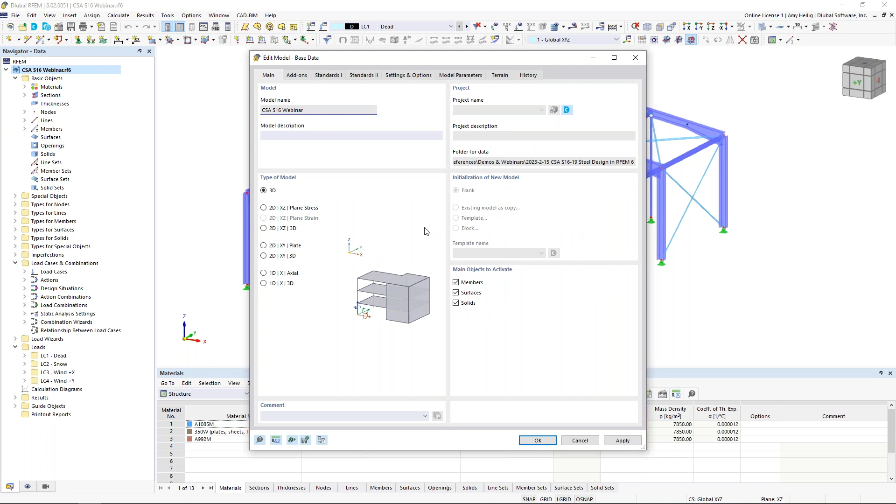Under this second tab, these are all of our optional add-ons. Notice that none of them are turned on right now. So everything that you'll see in this first portion of this webinar is involved within RFEM alone without turning on any of these add-ons.

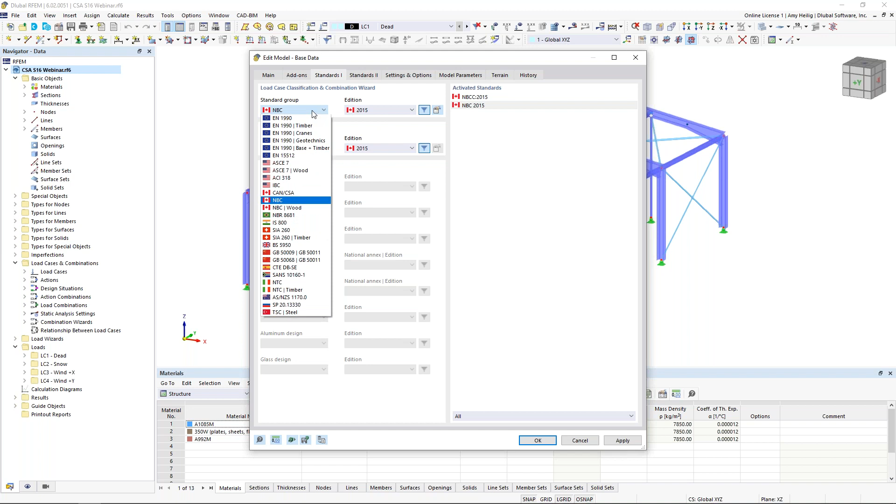Under the third tab, standards, we are going to generate our load combinations automatically according to the NBC 2015 standard. We are working in development on the 2020 standard, so that should be released fairly soon. But we also have access to all of our other international standards like the ASCE 7, the Eurocode, and many more.

Once this base data has been defined, we'll review the cross sections within the model. Over on the left, we can see all of the available cross sections here, including our moment frames, which are going to utilize W250 by 80 sections.

We have some tube sections, HSS 127 by 127, spanning between these moment frames. We have our lateral bracing here, which is going to be single angles. And then we have some pretty slender HSS columns at the front and the rear of the structure.

Notice that for these main moment frames here, these particular beams, we do have these set to a taper. So if we double click on these under the second tab, we can define a taper for any of the members, either at the start of the member or end of the member, and some additional options here.

We even can set the alignment here to the top of member, so notice that the member starts. I've converted this W250 by 80 to a parametric section and increased the depth to 500 millimeters, and then we transition back to the W250 by 80.

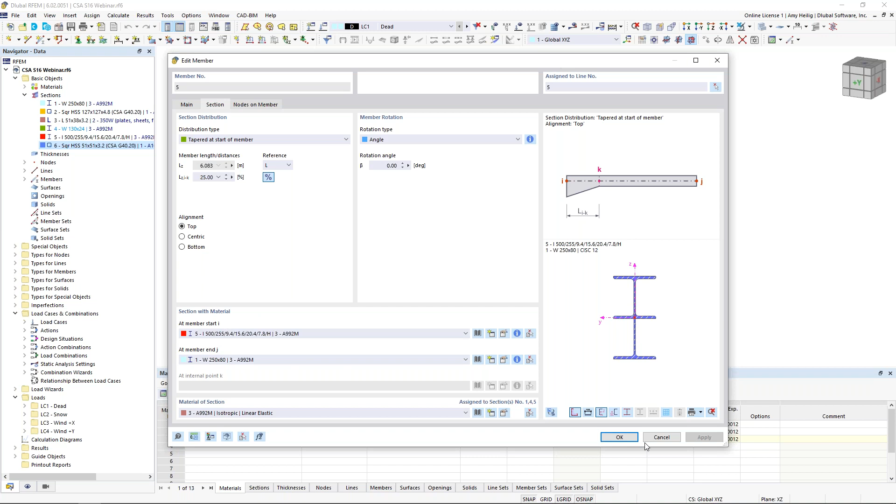We also have our materials listed here. Most of the HSS sections will utilize the A1085. Our single angles will be 350W, and our W sections will be A992.

What else is unique about this structure are the various member types. If we visit our navigator and the second tab in particular under display, this is going to control everything that we're viewing here in the graphical display.

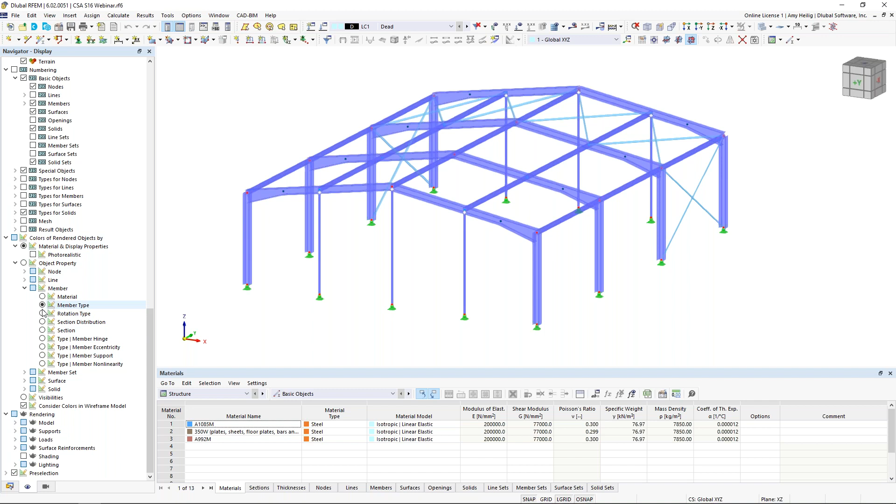If we scroll all the way to the bottom, we can actually render the colors of the model according to the member type. Notice these various member types are now color coded here. So we have our general beam elements, which is nothing more than just a standard beam or column.

If we double click on one of these, the member type is set here under this first drop down. We could activate hinges to release moment. If we leave this unchecked, everything is considered fully fixed.

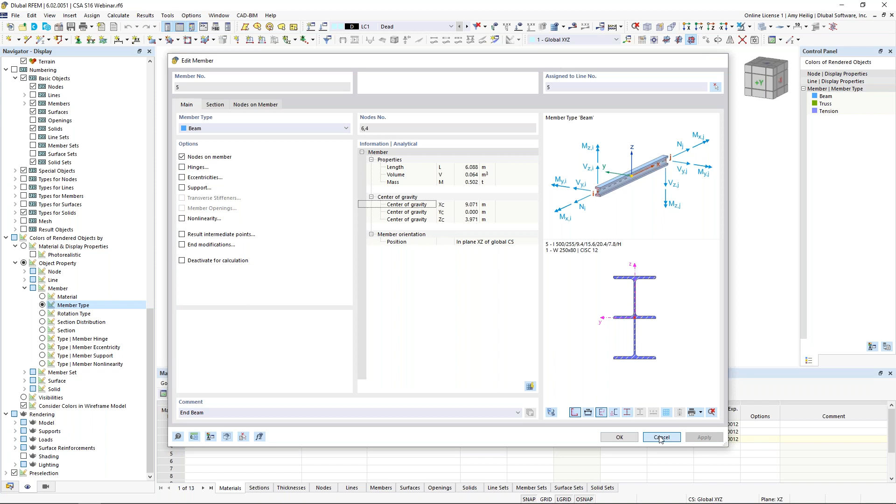But we also have what we call truss elements, so the member type is set to truss. Notice that this hinges option is now grayed out, because internally we're going to apply that moment release for truss elements.

And finally, we have our lateral bracing here, which are tension only. So exactly as it sounds, these members can only take tension forces. If they have any compression, they'll be deactivated within the analysis. RFEM is that nonlinear analysis program, so if tension forces are reintroduced in a subsequent iteration, we can reactivate those members.

So now that we've gone over a little bit about the structure, including the sections and materials, let us take a look now at our loads and load cases. I will activate here my load cases and combinations dialog box.

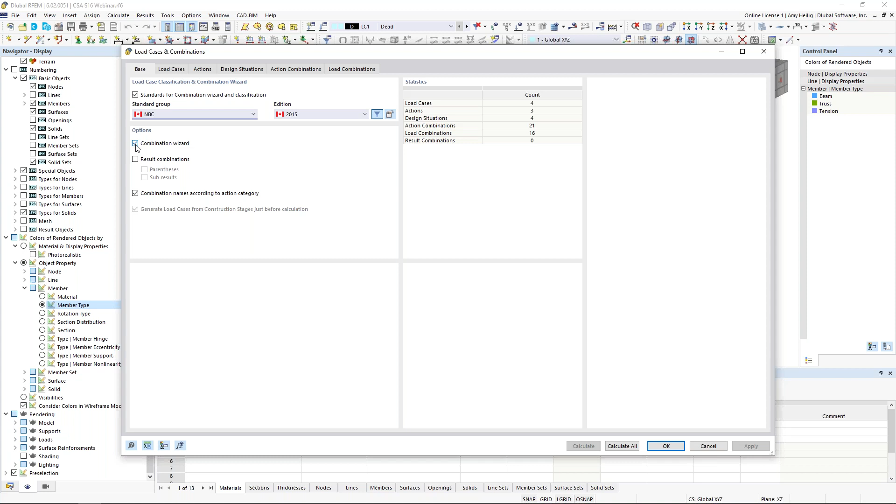Under the base tab here, this is just reiterating that we are going to generate our load combinations automatically according to the NBC standard. When this option is turned on, the program will automatically generate all of our load combinations according to this standard. Alternatively, we can turn this off if we would prefer to manually create the load combinations.

The load cases are listed here. So for example, 4 simple load cases for today: we have dead load with self-weight automatically turned on, and the action category is set to dead load. This is specific to the NBC. We also have snow load, wind in the X, and wind in the Y.

So the program will automatically generate for us what we call design situations. These design situations are needed a little bit later on when we do activate that steel design add-on, but it also is going to group together all of our load combinations.

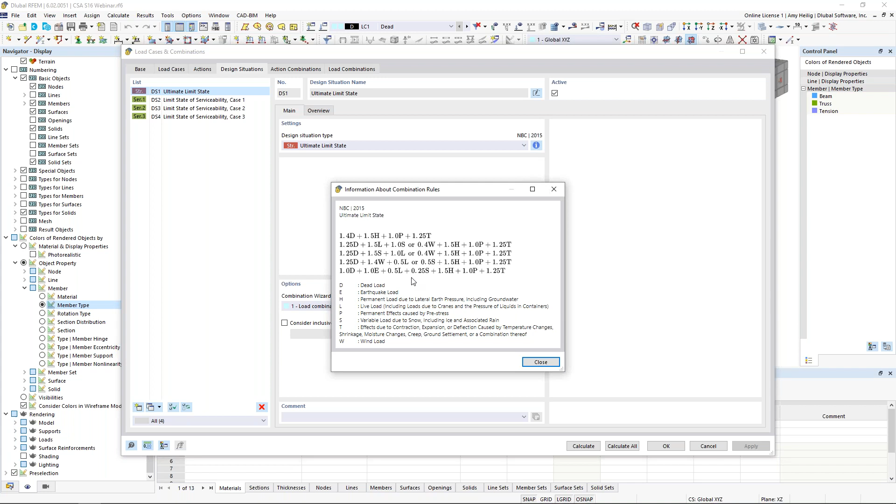Notice that we have an ultimate limit state design situation. This is going to be all of our factored load combinations. And if we'd like to see what this means or what it's referencing, we can click on this little info button to see directly from the NBC standard those factored load combinations.

Now we have 3 serviceability design situations as well. Again, we can click on this little info button—these are going to be our unfactored load combinations. If we don't want to use all 3 serviceability design situations, we can always uncheck the active box in the upper right hand corner, or we could delete it altogether with this button down here at the bottom.

But notice for these design situations, we have the option definition set down here, and we'll actually be in this dialog box quite a bit today. I just want to point out that initially our static analysis settings are set to second order by default. If we use this drop down, you can see we can modify this to a linear first order, or if we have cable elements or fabric membranes, for example, then we would be running a large deformation analysis, but the default is second order to account for those P delta effects, so something to keep in mind there.

If we jump to the load combinations tab, we can actually see the individual load combinations listed out, each belonging to that specific design situation. So here in red, we have our factored load combinations belonging to our first design situation, and then all of our unfactored load combinations belonging to those 3 serviceability design situations.

Each one is showing here that it's going to be run according to a second order analysis because we've already defined that under the design situation. But by all means, you can come in here and make individual settings for each load combination if you prefer.

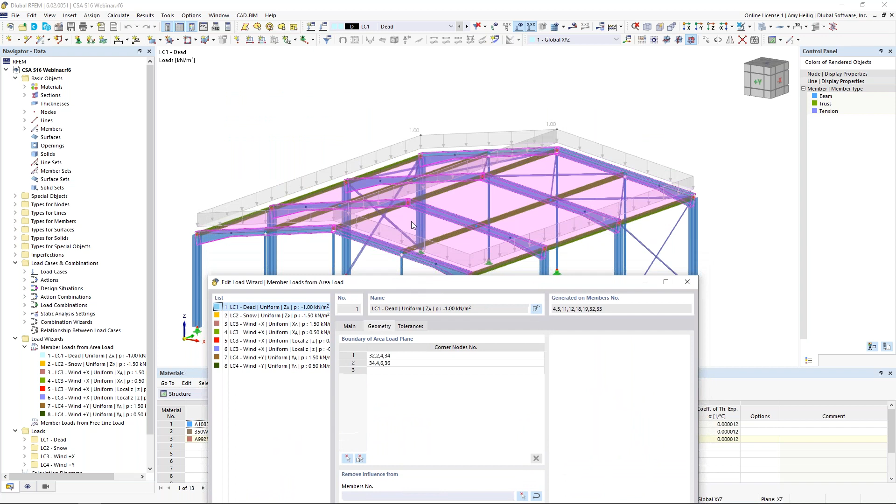I've defined the load magnitude at -1 kilonewtons per meter squared. Under the geometry, these are the 4 corner points that define the left plane and the right plane.

I took this a step further where we can exclude members from this generated area load. I graphically selected these 3 members here, visible on the left-hand side. Not only will the program exclude these 3 members, but it will also exclude all members parallel to it, saving time so we don't have to individually select each member.

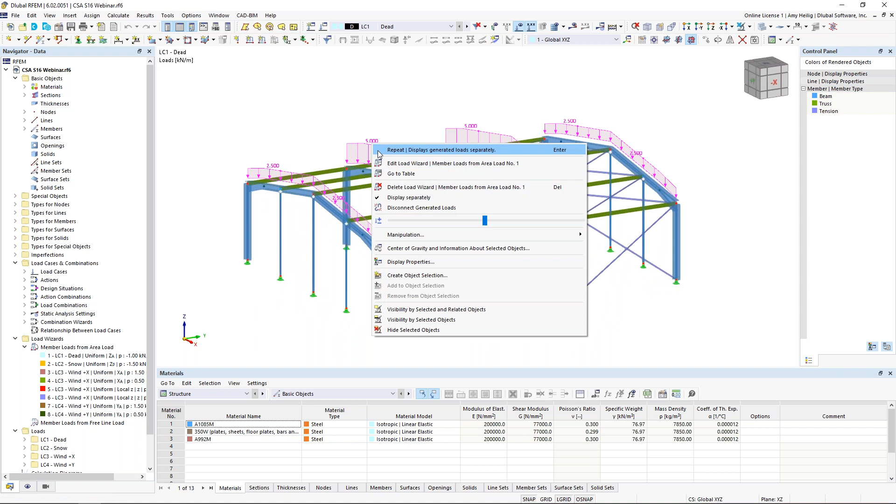Once this is complete, we see this generated area load, which we can right click to display separately. Notice my load is now being distributed only to those main moment frames. The tributary area is automatically accounted for, so nothing further to do here for dead load. We can right click and turn off the display separately to go back to the previous view.

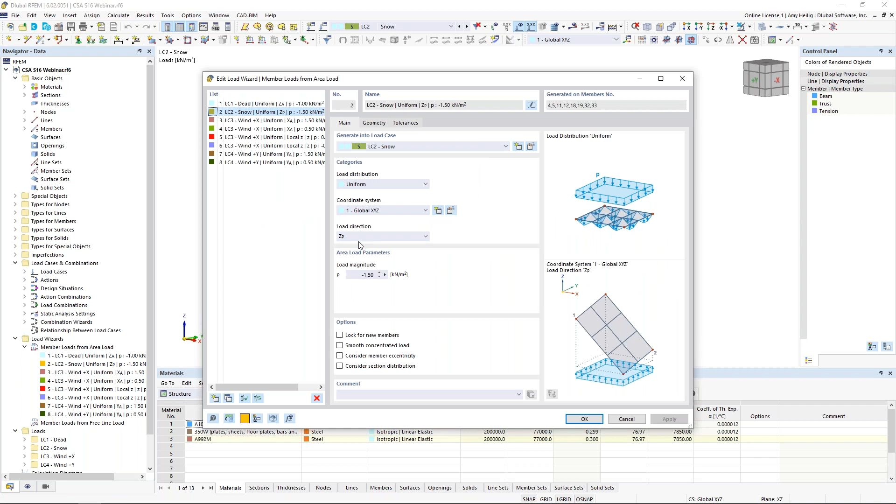As far as snow load, exact same concept here. The only difference is that I modified the load direction in the projected Z direction, so we can account for the angle of our roof and modify the loading according to that angle. The load magnitude was also adjusted to negative 1.5 kilonewtons per meter squared, with the same geometry here.

When I take a look at this in the model and display separately, it should look fairly similar to our dead load, but just with adjusted load magnitude.

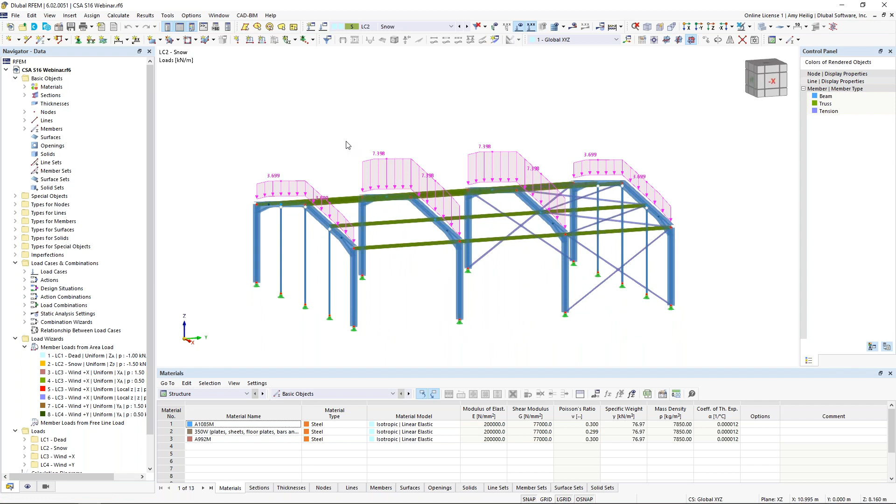Now, finally, we have our wind load. We are working in development to generate wind loads automatically, as well as snow loads according to the NBC standard. They will be available under the load wizard. We hope to release that fairly soon, but for now we need to manually apply these loads to the structure, and I've done so with those same member loads from area load generator.

You can see here I just modified where my planes are located, as well as the magnitude. We can right click to display separately. We're assuming our wind load is flowing from left to right based on the global x-axis, and we can see all of those member loads assigned here.

We can also take a look at wind in the Y direction. We're assuming wind flow here from right to left based on the global Y axis. Right click to display separately, and we can see those member loads attributed to each of those vertical members as well as horizontal members for this particular plane.

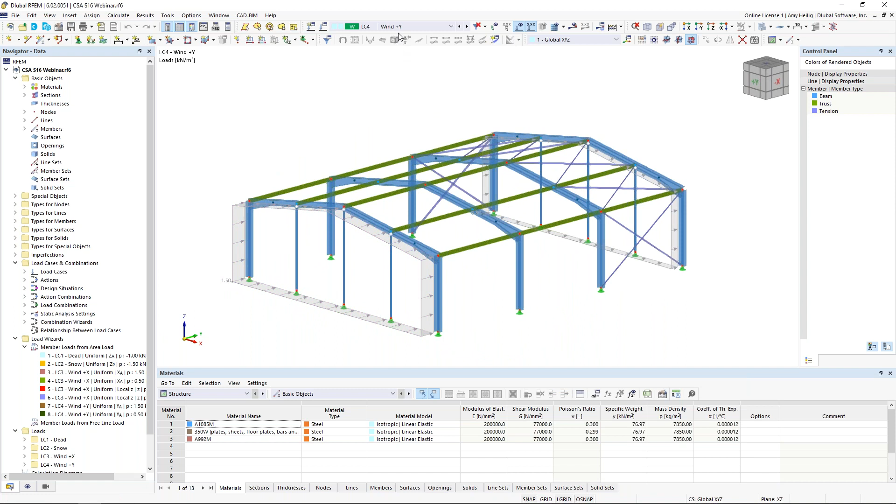Now that we have applied all of the various loads under the specific load cases, we can view our load combinations, and we have the ability to display all of these loads on the structure at once, including the applicable load factors from the NBC.

So what I would suggest doing early on in the model is to complete most of the modeling and the loading, and it's always a good idea to run a quick calculation before we get too far into it, to ensure that we don't have any modeling errors.

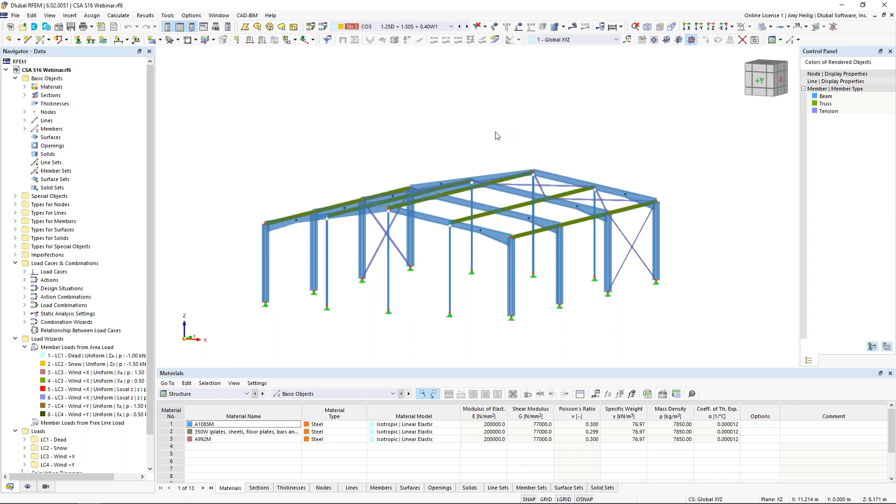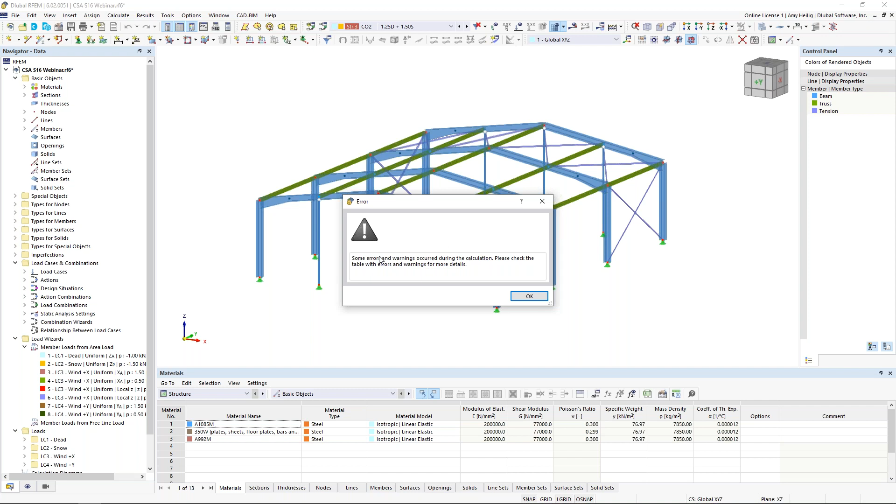So what we can do is jump to load combination number 2 here, 1.25 dead plus 1.5 snow, and I'm just going to run this single load combination. When I run the calculation up in my toolbar, we immediately notice that the program doesn't solve. We get an error message saying we have some errors and warnings, please check the table.

When we look at the table and click down in the cell, we see the program telling us that the stiffness matrix is singular. The structure is unstable about FE mesh node number 59, about the global x-axis, and we can see where that red arrow is pointing. That red arrow can actually help us troubleshoot instabilities a lot of the time, but that's not always the case.

If we have more of a global issue, this red arrow may not be so helpful. But in this particular case, if we zoom in, everything appears to be connected properly. We just have this pretty slender column framing up into the beam with our HSS tube in between frames. So I really don't know how to troubleshoot any further just by simply viewing the model.

So this is where we want to take advantage of our first add-on. I right click under my base data to go back to this dialog box that we previously saw.

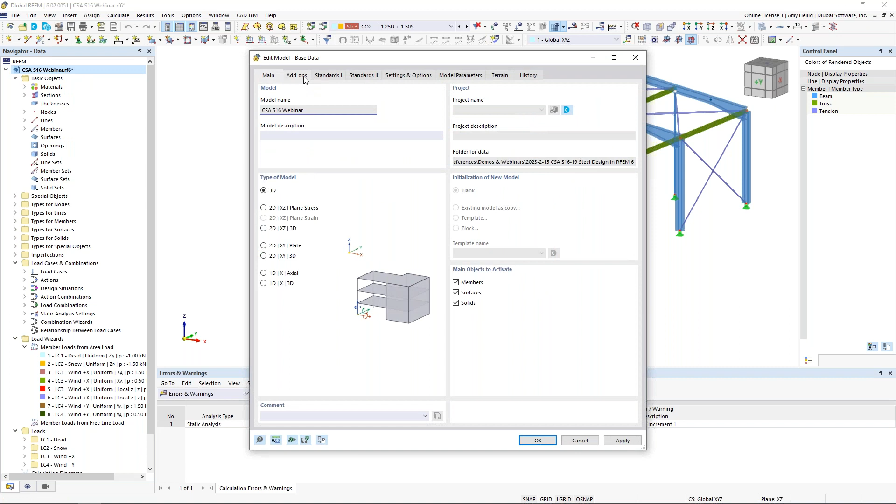Under the add-ons, we'll make the clear distinction here that we now want to activate the structure stability add-on. When I click OK, everything seems like nothing is much really changed within the model, but what we can do now is go back to the load cases and combinations dialog box, and under load combination number 2, we now have the ability to calculate the critical load utilizing that structure stability add-on.

So when I turn this on, we have some additional settings in this dialog box that pops up. The stability analysis add-on will actually run an eigenvalue analysis, and we can view all the different eigenvalues set here. The problem is if I try and run this calculation, I'll get another error, simply because load combination 2 doesn't solve either. So we have this feature on the right-hand side where we can actually calculate without the applied loading to check for instabilities by the mode shape.

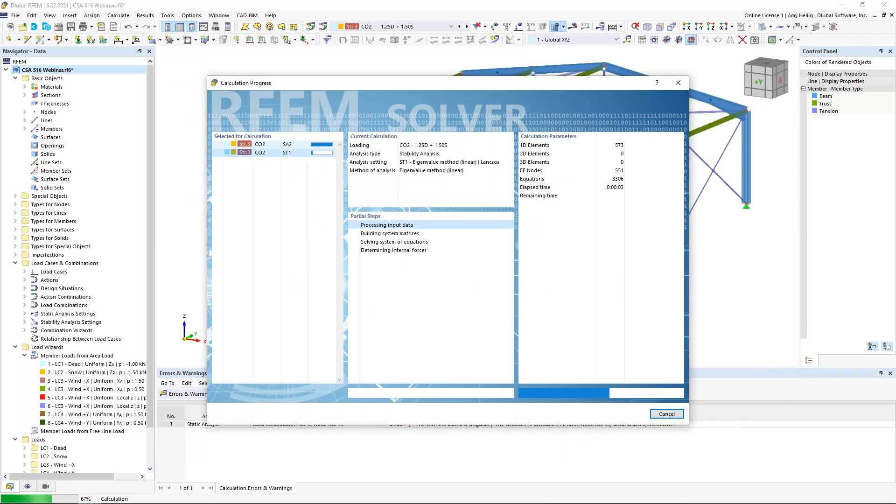Notice the number of eigenvalues is now grayed out. We leave this option active, I click OK, and I can click calculate while I'm here within this dialog box. Once again, we solve for load combination number 2. We still get an error, but now we do have some results for that stability analysis add-on.

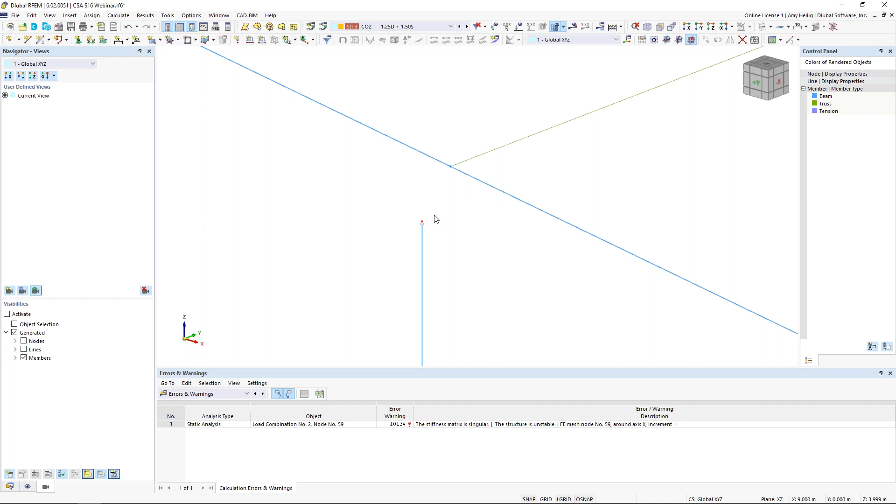And we immediately see where the problem lies. It almost appears as though this column is not connected to the member. Well, perhaps I turn off my results here and go into a wireframe view, zoom in much closer than I was previously, and I actually see that these two nodes are not connected. So this is a simple fix where we can just drag and drop that node to connect to that particular beam, and that should address the issue.

So we can see how that stability analysis add-on can be used to troubleshoot unconnected nodes, for example. Now that we've corrected that modeling error, let us go back to load combination number 2 here, and we'll turn off the structure stability add-on. We'll try and calculate once more. So we've addressed that modeling error, we run the calculation, and unfortunately what we see is still another instability.

So I click OK and I click down here in my error message, but notice that my red arrow has now moved. I have an instability about FE mesh node 128 about the global axis X. Well, at this point, I've already ruled out any modeling errors. All the nodes are connected, so all the supports are connected. So what can we do here?

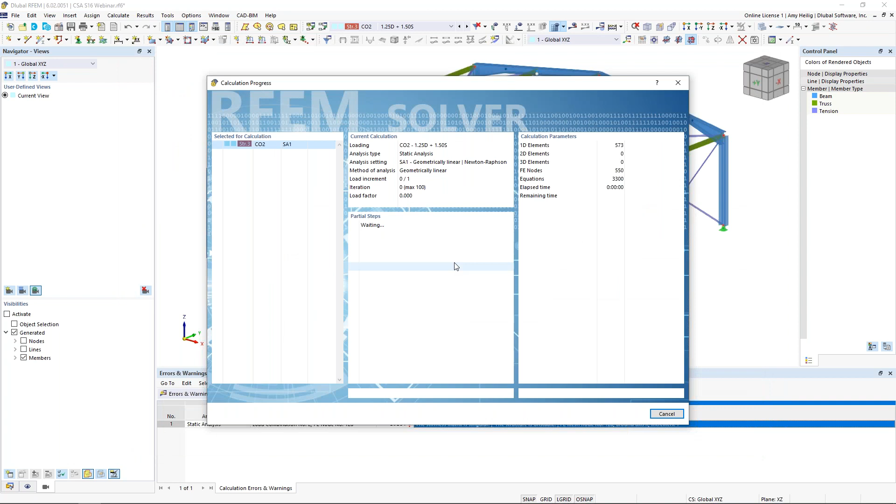Well, the first suggestion is remember that we're running load combination number 2 here according to a second order analysis. The best approach, if we've ruled out modeling errors, is to change this single load combination to a first order analysis. Let's see if the model solves by changing this analysis type. So we click calculate, and what we see is that the model solves just fine under first order.

So now we need to move on to troubleshooting for this second order analysis instead. Well, once again, we can take advantage of the structure stability add-on. So we reactivate this for load combination number 2. Let's go into the detail settings here. Now I'm going to turn off this option on the right-hand side.

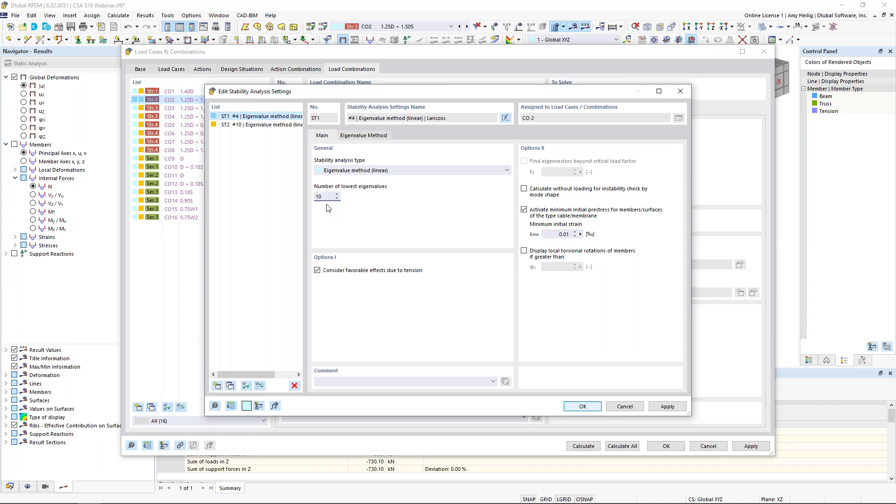The reason why is because we can run an eigenvalue analysis since load combination number 2 solves just fine under first order. Perhaps we increase this to show the number of lowest eigenvalues as 10. We click OK and we click calculate. So the program will run through that first order analysis, but now it's going to run an additional eigenvalue analysis to show us the first 10 failure modes of our structure.

So we use our drop down on the left to not look at the static analysis, but let's take a look at the stability analysis. And sure enough, here are our 10 different eigenvalues shown here in the drop down. We also see it down here in our table under stability analysis.

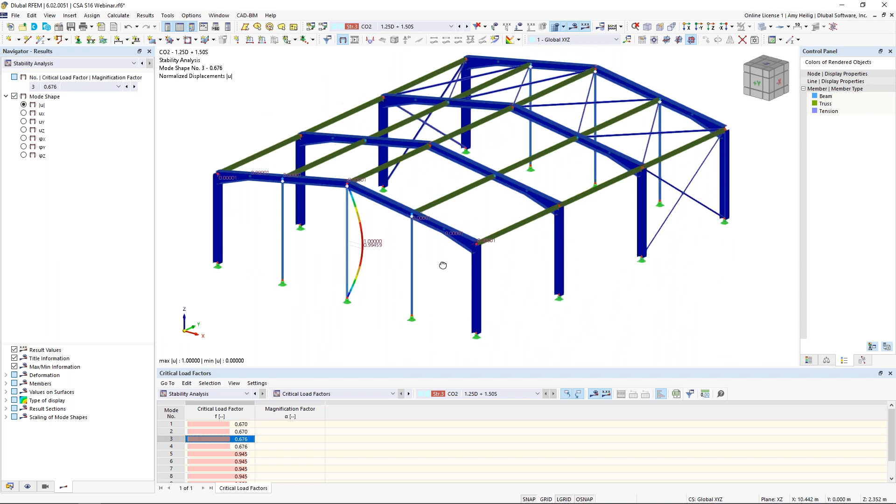And the first failure mode shape looks to be this very slender column buckling in plane. If we look at the second mode shape, same column buckling out of plane. We take a look at the third mode shape, and it seems to be the same column just on the other side. If we look at the critical load factor, we immediately see what the problem is. It is 0.67. This means that the structure can only take 67% of the loads from load combination number 2 before we're going to see this flexural buckling failure of these slender columns.

So anything under 1.0 is always a problem. So how do we address this? Well, probably the easiest fix is to increase these cross-section sizes. I think we can all agree just by looking at it, they're much too slender. So let us highlight all of these members.

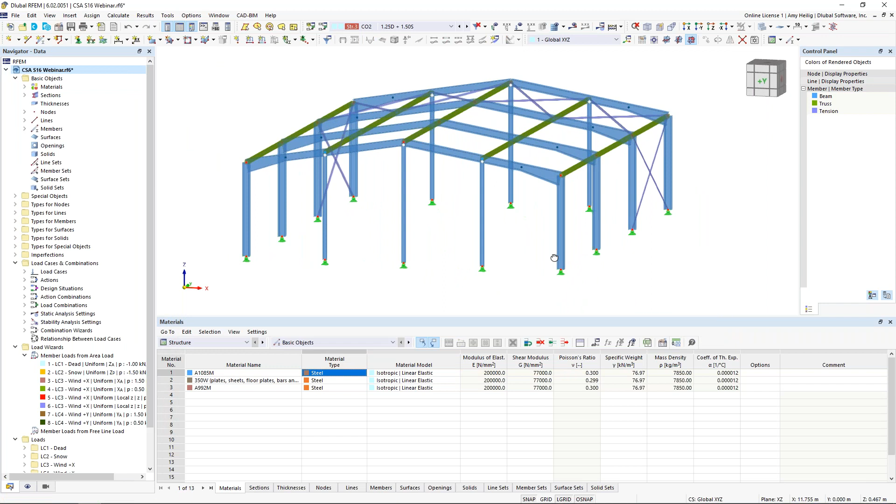We can double click here, and under the section, we can use our drop down to change these to an already defined cross section in my model, a W130 by 24. So let's completely change this to an I-beam here. I click OK. It's asking me to clear my results. That's fine. And now we can see the structure looks quite a bit better without those very slender members.

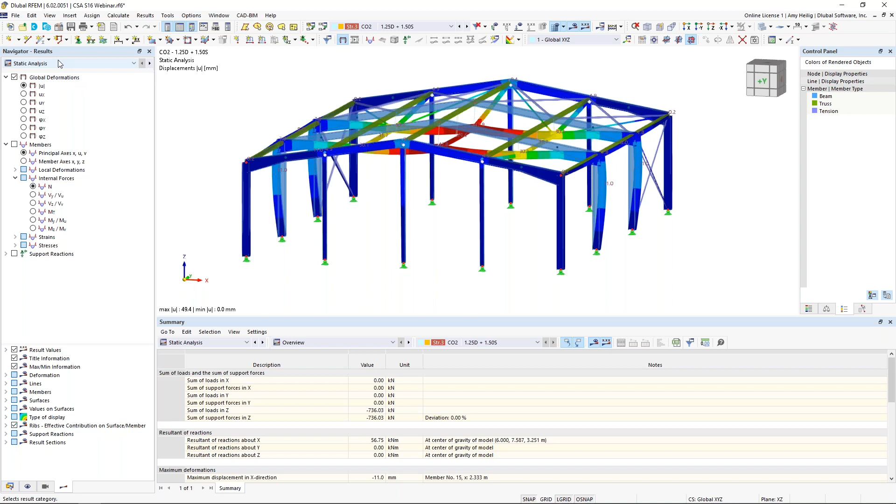So we go back to load combination number 2. We change this back to second order, and we can go ahead and run the structure stability add-on just to see how our results vary. When we modify this, what we see here is that second order should solve just fine. We also see here the stability analysis. So we're taking a look at the static analysis. If we jump down to the stability analysis once again, and we take a look at our first failure mode,

it once again is this column, but notice that my critical load factor is now 9.92. So what this means is that the structure can handle over 900% of the loads from load combination number 2 before we see some stability failure mode as we see here.

So again, that structure stability add-on can be incredibly helpful, not only for simple modeling errors of unconnected nodes, but when we're trying to troubleshoot something that we really can't determine just by looking at the model itself, such as failure modes under stability, we could certainly utilize that add-on.

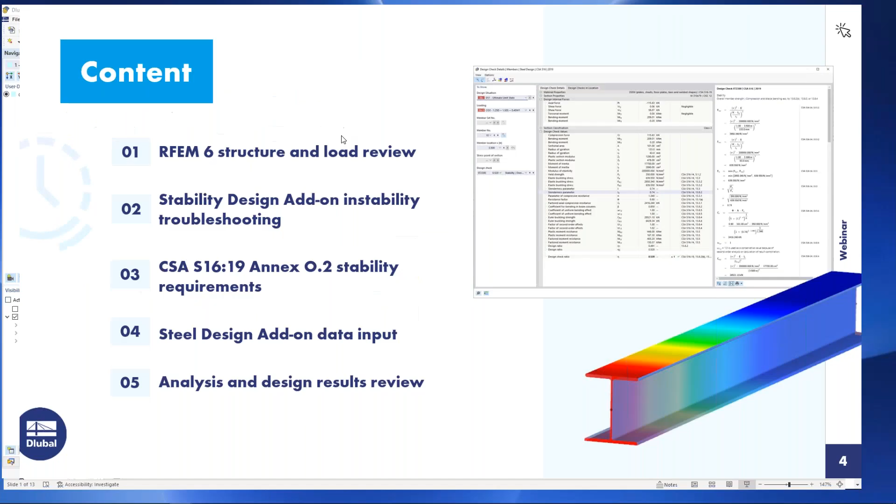All right, so now that essentially our modeling, our loading is complete, let us jump back to the PowerPoint here, and we'll discuss specific to the 2019 standard stability considerations.

And we know in clause 8.4, the code tells us that the structure absolutely has to be defined or designed for stability. Looking at 8.4.1, the code tells us that stability shall be provided for the structure and all elements of the structure, considering topics such as deformation, second order effects such as big P delta, little p delta. We have geometric imperfections, stiffness reductions, and uncertainty in strength and stiffness.

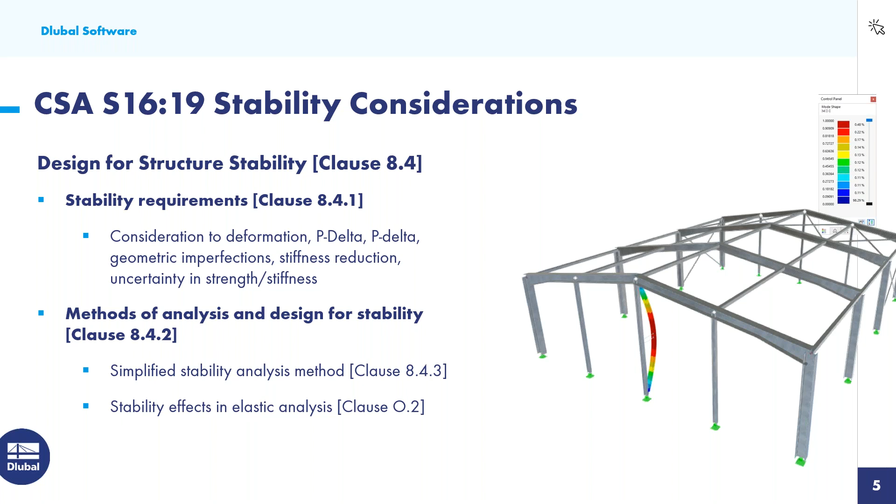Well, within the code, in particular clause 8.4.2, we are given two methods for the analysis and design for stability. The first is this simplified stability analysis method in 8.4.3. So for those of us that have been doing steel design for quite some time according to the CSA standard, this is probably nothing new. But within the 2019 standard, we know that there has been an alternative method added, which is stability effects in elastic analysis in Annex O, which is laid out in clause O.2. And this is what we're going to be focusing on today and how we can apply that directly to our structure. But before we do, let's discuss the simplified stability requirements.

And this method, again, is given in 8.4.3. The first requirement is P delta effects. This is explained further in 8.4.3.2, and we have two options to consider these second order effects. The first is simply a second order analysis, and we saw back in RFEM for our load combinations as well as what we set under the design situation that all of those load combinations will automatically be solved for according to second order. So this is certainly our approach here. The alternative method is to apply what we call the U2 amplification factor, and this is given in 8.4.3.2b.

So we take this amplification factor and we apply it to the member's axial loads and bending moments from the first order analysis. So perhaps your software only has the capabilities for a first order analysis, or you're doing hand calculations, then you would probably be utilizing this U2 amplification factor.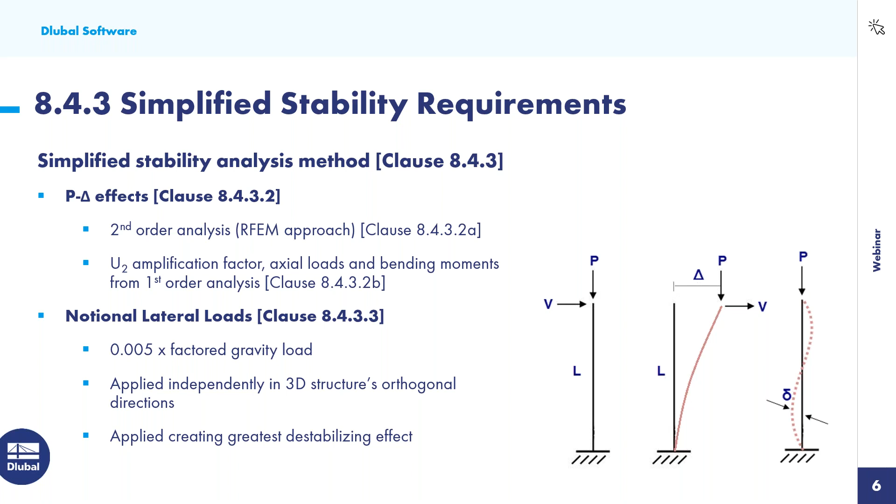And one last thing to keep in mind is that if we are applying notional loads to the top of the member, we do want to apply an equal and opposite load to the bottom of the member to correct that fictitious horizontal reaction at the base of the member. We don't want to over design our foundation here. This is really for the member design.

Okay, so now that we have taken into consideration the simplified stability analysis, we have this alternative now in Annex O laid out in Clause O.2 for stability effects in the elastic analysis. There are several requirements, some similarities, some differences here from this simplified method.

The first is geometric nonlinearities for second order effects according to O.2.2. So we do want to account for big P delta here, and we saw this on the previous slide. The program will automatically account for that, no problem.

But it does also mention P little delta effects that the simplified method did not. So there are conditions to neglect P little delta effects, and these are laid out in O.2.2 A through D. So if you do meet those requirements and you are designing according to Annex O, perhaps you don't necessarily need to consider P little delta.

If you do include P little delta, the advantage here is that this factor given to us in Chapter 13, under member axial compression and bending design, U1, we can set equal to 1.0. This factor is used to account for second order effects due to deformation between the member ends. So again, the advantage of including P little delta in the analysis is that we can automatically set this factor to 1.0.

So we might be wondering, well, we know probably RFEM includes big P delta, but does it include little P delta as well? Well, we actually have a knowledge base article, number 1759, directly on our website, and I have set the hyperlink here. So if we access this knowledge base article, we can see that the title is Consideration of P Little Delta Second Order Effects in RFEM 6.

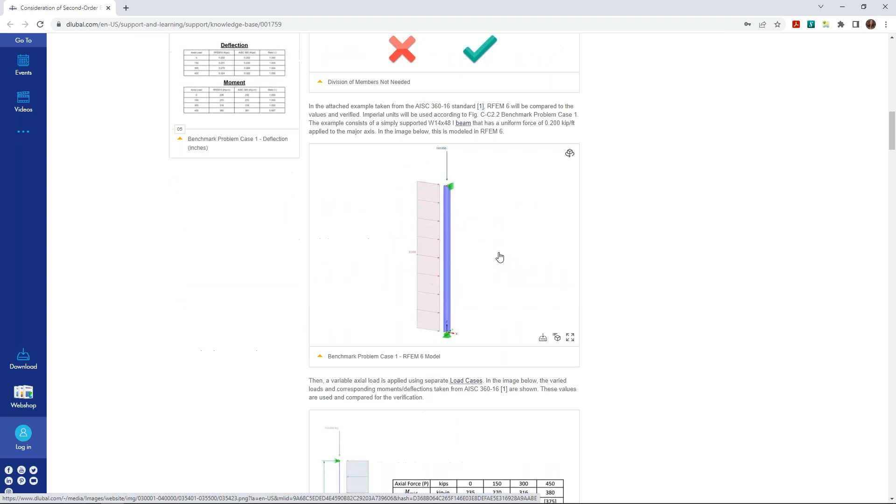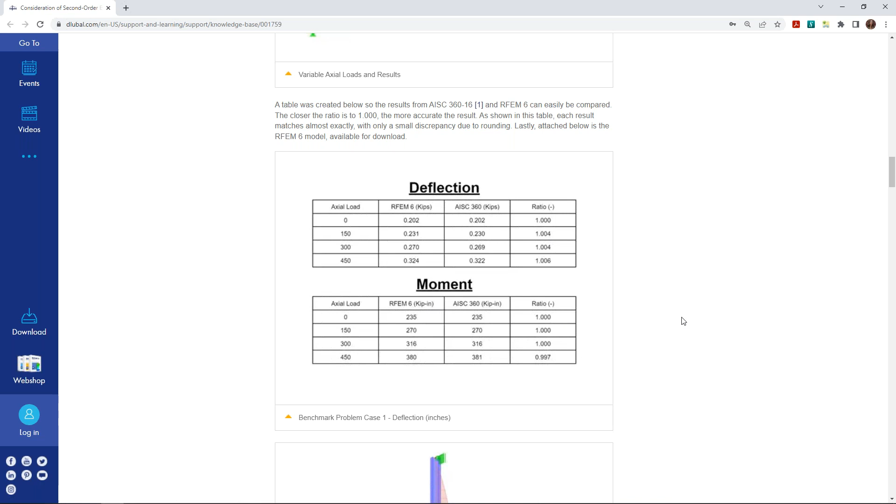And if you're interested to take a look at this article, you can zoom in here and we can actually see the ratios comparing the AISC to RFEM, and we see those ratios are very, very close to 1.0. This PowerPoint will be available to you on our website after the presentation, again, with the hyperlink to this knowledge base article if you'd like to check that out further.

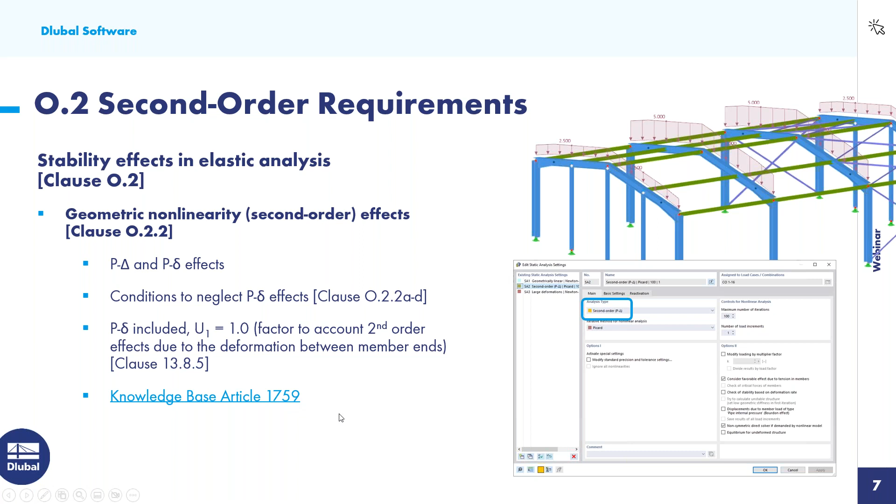All right, let us move on to imperfection requirements. Geometric imperfections are addressed in Clause O.2.3, and the code tells us that member and local geometric imperfections can be neglected for the elastic analysis.

Rather, we're concerned with global geometric imperfections, and there's a couple listed methods for these. Now, before we look at these methods, there are a couple criteria where we can completely neglect global imperfections for lateral load combinations only, and these are listed in O.2.3.1.

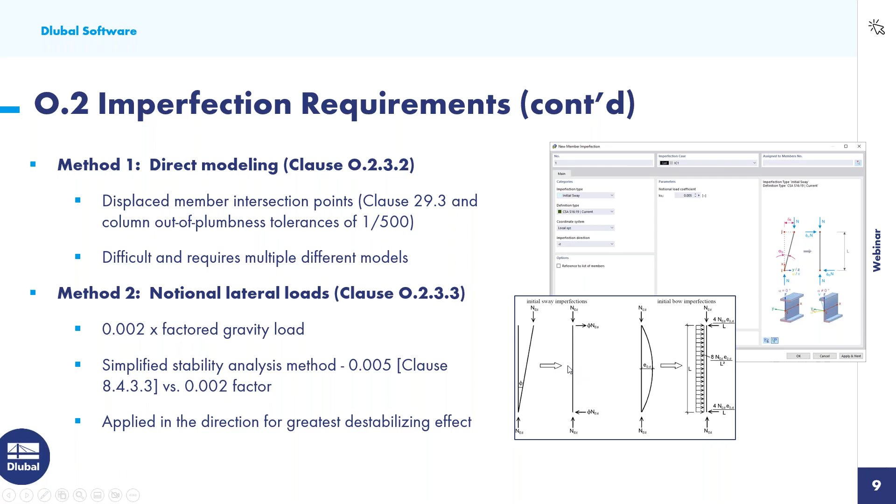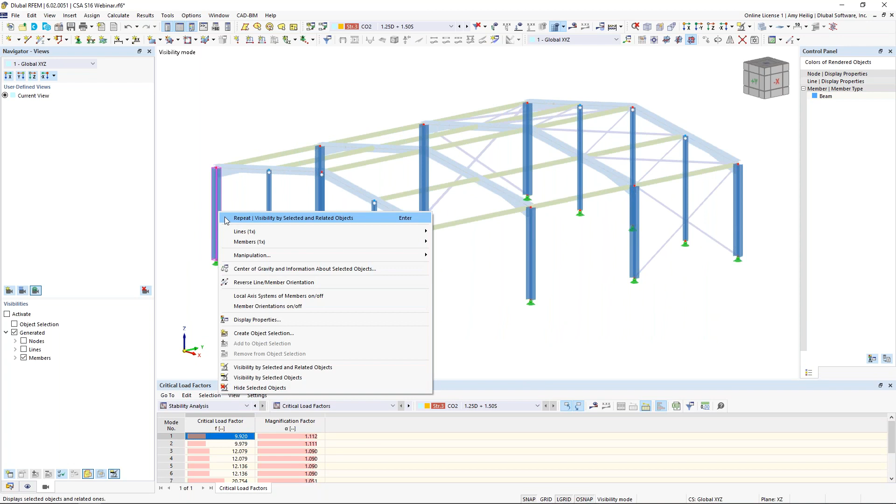So we will go back here to the RFEM model to see how we can apply those notional loads to our vertical members here. Well, I'll begin by selecting all of my vertical elements by holding down my shift key, and I'll create a user-defined visibility here for only my columns. And I'm going to right click, and under the right click options here, we can turn on our local axis system of each member. Now, to apply the notional loads, we go back to our navigator, and what we should see over on the left is a folder called Imperfections.

The first option under this folder is Imperfection Cases, where we can right-click to create our new imperfection case. The first case is going to be imperfections in the positive X direction, and our second imperfection case is going to be imperfections in the Y.

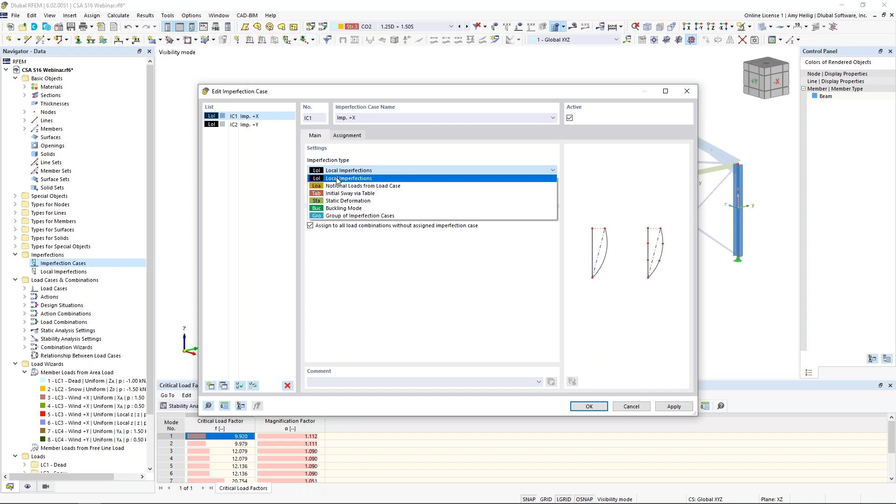With these imperfection cases, we have many different types available, but we're focusing here on local imperfections to be applied directly to the members. Now, under the assignment tab, remember we're creating the greatest destabilizing effect. So my imperfections or notional loads in the X direction should be assigned to my wind in the X direction, and my imperfections in the Y should be applied to my wind in the Y.

Notice all of our generated load combinations are already listed here in the background. The program's intelligent enough to apply these imperfections to our gravity load combinations, but my imperfection in the Y will only be applied with my wind in the Y. We'll never see imperfections in the Y applied with wind in the X. This would just create more load combinations that aren't going to be controlling, so it's really not something we need to include.

Once we have created the imperfection cases, we click OK, and it asks me to clear my results. We should now see those available under the local imperfection tree option over on the left. We actually need to now apply those notional loads to each of these vertical members.

Under my first imperfection case in the X, I can double click on member imperfections to open up this dialog box. The imperfection type is initial sway. Remember, we talked about initial bow, but we're going to focus here on the initial sway. The definition type can be set to the CSA S16.

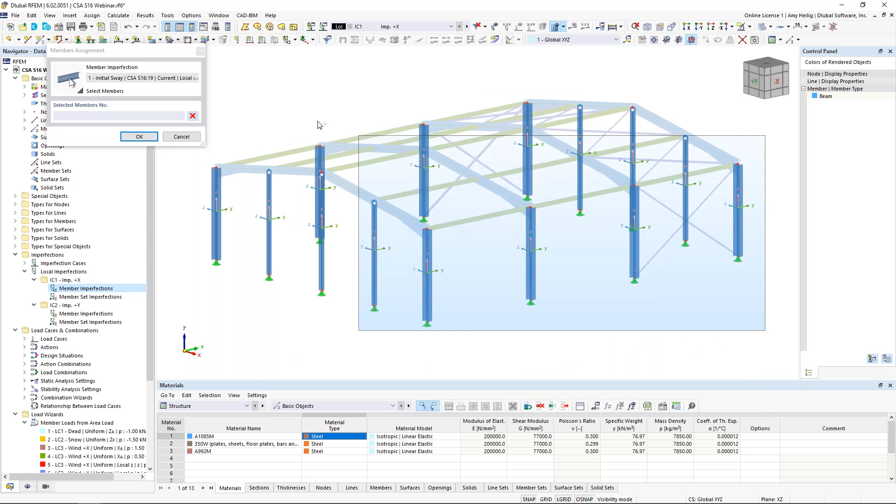Now the notional load coefficient, 0.005, is the default from the simplified method. Let us modify this to 0.002 from Annex O. And then we can graphically select all of our vertical members shown here. You can see they're now listed. I click OK. I click OK.

I can cancel out of this visibility mode and turn on the display of my imperfections to now see this column out of plumbness in the global X direction.

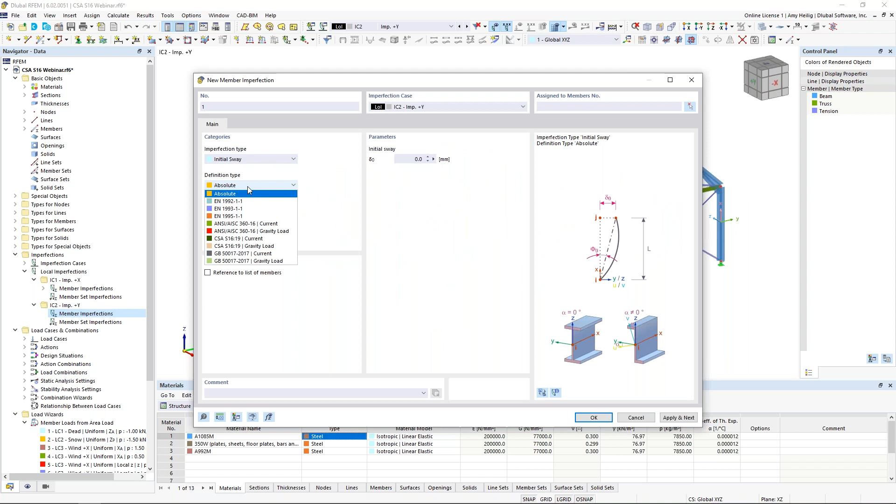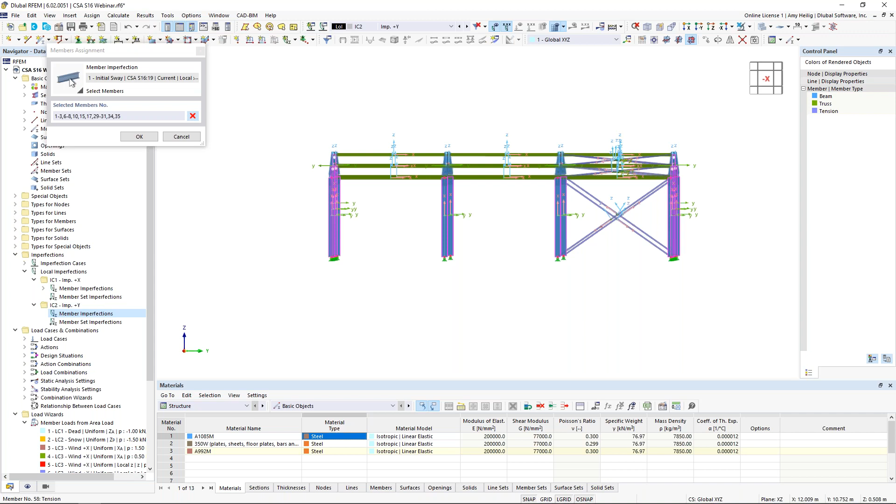We do the exact same thing for our imperfection in the Y. It's going to be the initial sway with the definition type of the CSA S16. The difference here, though, is that we now want to apply this in the member's positive local Y direction from our dropdown. We are going to modify the load coefficient to 0.002, and then we are going to apply this to only our vertical members here. Notice I'm not applying to any of the additional members, but only those vertical columns.

I click OK through these dialog boxes, and now we see the out of plumbness in the global Y direction. So I can right click here to turn off the local axis system. We've now applied those notional loads to the member.

There's one more quick step that we want to look at here. If we drop down to one of our load cases or combinations, we can choose the button here to edit the active load case to bring us back into our load cases and combinations. Under the design situations, remember I said we would be in these options quite a bit today.

Let us take a look at the definition type here for a combination wizard. Remember that we have set this to second order analysis, already meeting those requirements from the CSA standard, but we also have the option turned on automatically to consider the imperfection cases. So those imperfections will automatically be considered for all of my factored load combinations.

But here's the problem: all of my serviceability design situations and load combinations also utilize the same definition number 1 here. I do not want to apply those imperfections to my serviceability load combinations.

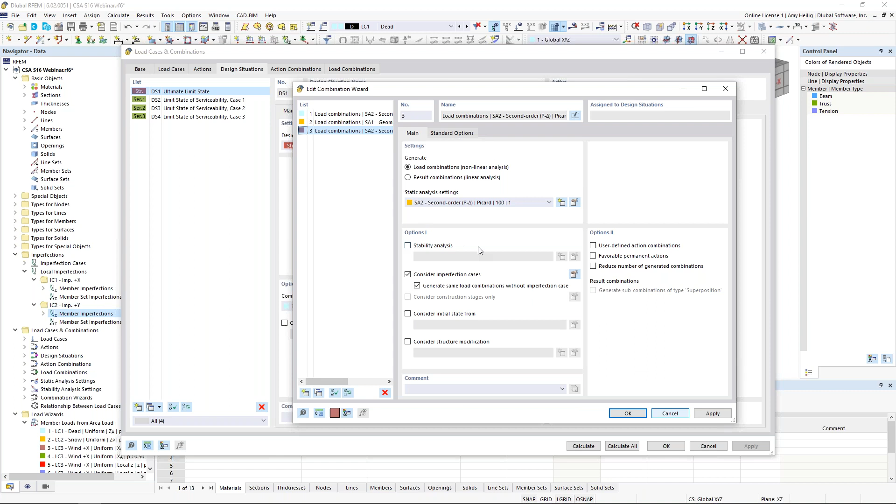So how can I modify that? It's quite simple. We can just make a copy of this existing definition number 1, so now we have our new definition number 3. We're still running according to second order analysis, but I'm going to turn off my imperfection cases. I click OK, and now from my serviceability design situations, I hold down my Shift key, and I can use this dropdown to assign them to definition number 3 here that does not include imperfections. But if I go back up to my ultimate limit state, it's utilizing this first definition type that will include the imperfections. Now if we look at our load combinations, we see quite a few more load combinations for our factored situation here.

For example, if we look at the first 3 load combinations, they look identical with 1.4 dead. But notice the first is 1.4 dead without any imperfection, the second is 1.4 dead plus imperfection in the X, and the third is 1.4 dead plus imperfection in the Y. So when looking at some of these additional lateral load combinations, we should see one without the imperfection, but wind in the X will only include imperfections in the X, and wind in the Y will only include imperfections in the Y. So the program has that intelligence to correctly apply those imperfections to the correct load combinations. If we jump down to our serviceability, notice imperfections is turned off for all of them, and that's exactly what we wanted.

Okay, so now that we have applied the notional lateral loads to the structure, let us go back to the PowerPoint to discuss the final requirement of reduced stiffnesses. Reduced member stiffnesses are addressed in clause O.2.4, and these are to account for initial geometric imperfections. If you remember, we neglected those with the global geometric imperfections on the previous slide. We also want to account for inelasticity and uncertainty in strength and stiffness.

So how we do this is we apply a couple of factors to the member's axial stiffness, EA, as well as the member's flexural stiffness, EI. The first reduction factor is 0.8, so that's fairly straightforward. The second reduction factor is tau sub b, and tau sub b is dependent on the factored axial force, so what's the axial force on the member from the applied loads, as well as the axial strength of the member itself. And we can see here directly from the standard that depending on what this ratio is, this is going to affect our tau sub b.

So any ratio less than 0.5, tau sub b will be equal to 1.0. When this ratio is greater than 0.5, then we need to use this iterative calculation here to determine what that reduction factor should be for tau sub b.

We will find here a lot of similarities to the AISC, Chapter C, the direct analysis method. One big difference though that you'll notice is that in the AISC, tau sub b is only applied to the flexural stiffness. The CSA, on the other hand, applies tau sub b to both the axial stiffness and the flexural stiffness. So that's one difference we'll find between those two standards.

So once again, we'll go back to RFEM to see how we can apply these reduced stiffnesses to our structure today. We go back to our load cases and combinations, and once again, under the design situations, we will revisit the combination wizard options here. So it's kind of nice that all of these stability requirements are all really maintained here in this single dialog box. And to consider the stiffness reduction, we have here what's called a structure modification.

We're going to turn this on for this first definition type here, and we create a new setting that's going to be applied specifically to our members. We get a new tab here for members, and we use our drop-down box to create a new member stiffness modification. Now we have this additional drop-down where we can directly select the CSA S16 standard, giving reference directly to clause O.2.4.

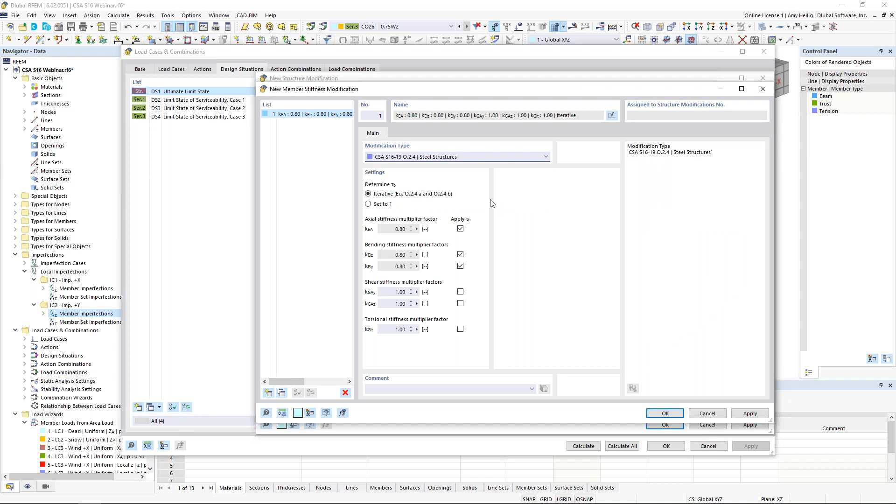Here is where the program can actually apply and determine this tau sub b based on these iterative equations set forth in Annex O to each individual member. Alternatively, if we want to just use 1.0, we can set that to 1.0 for tau sub b for all members or whichever members we select. But for now, we'll leave this as the iterative option to refer to the standard equations.

We also see that 0.8 factor, so both 0.8 and tau sub b will be applied to the axial and bending stiffness. If we've decided too that the shear and torsional stiffness contribute to the structure's lateral stability, then we'd want to go ahead and turn those on as well. But by default, these are turned off.

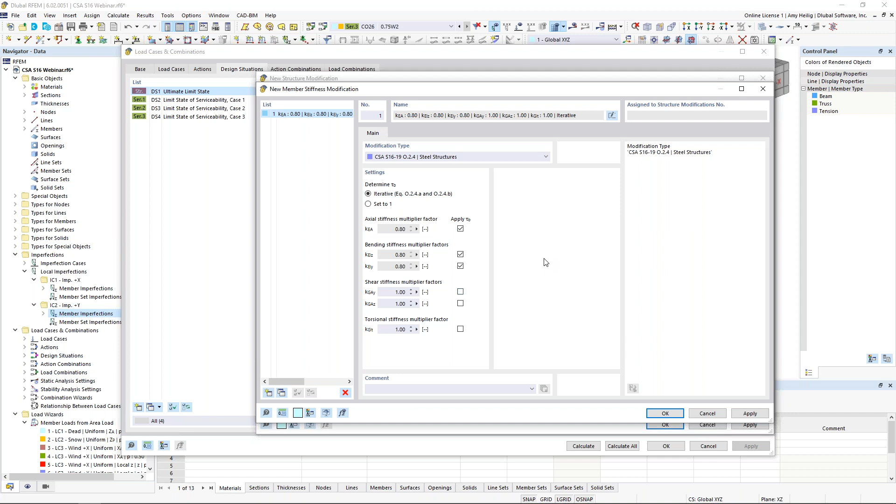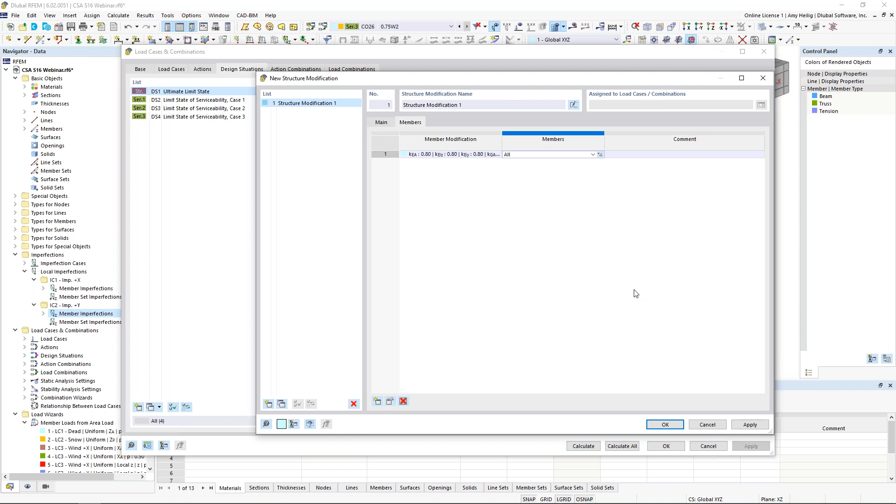So once we've created this definition specific to the CSA standard, we would want to apply it to the specific members within the model. If you remember, the code says to go ahead and apply it to all members. We could graphically select it with this pointer option, or we could use our drop-down box here just to select all. So now that stiffness reduction will be applied to all members within the model.

We click OK, but notice my third definition type here that's assigned to my serviceability, we leave this unchecked. We want the full stiffness to be used. We click OK. Under the load combinations, what we see here is that structure modification is activated for all of our factored load combinations, but under our unfactored load combinations, that option is turned off.

Okay, so now we are complete here with those stability requirements from Annex O. I want to move into the actual steel design add-on.

So what we will do here is right-click and open up our base data, and under the add-ons, we will now activate steel design. So again, everything that you've seen up until now, with the exception of addressing those instabilities where we use the structure stability add-on, has all been within RFEM alone, including imperfections and stiffness modifications - that's all within the main program. So we're activating here the steel design add-on.

Under the standards, you now see steel design available to us here according to the CSA S16. The steel design also has access to all international standards as well, so when you purchase this add-on, you'll have access to the AISC, the EC3, and other international standards shown.

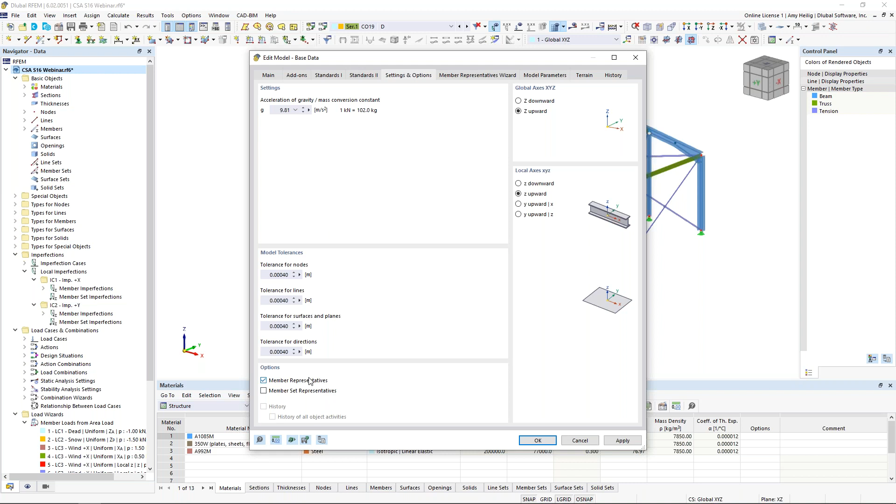The additional setting that I'd like to turn on is under settings and options - what's called member representatives, and we get a new tab here. Member representatives are just going to group together similar members that have the same material, the same cross-section, the same length. We can even turn on some optional options here, such as the comments, which I have turned on for our model today.

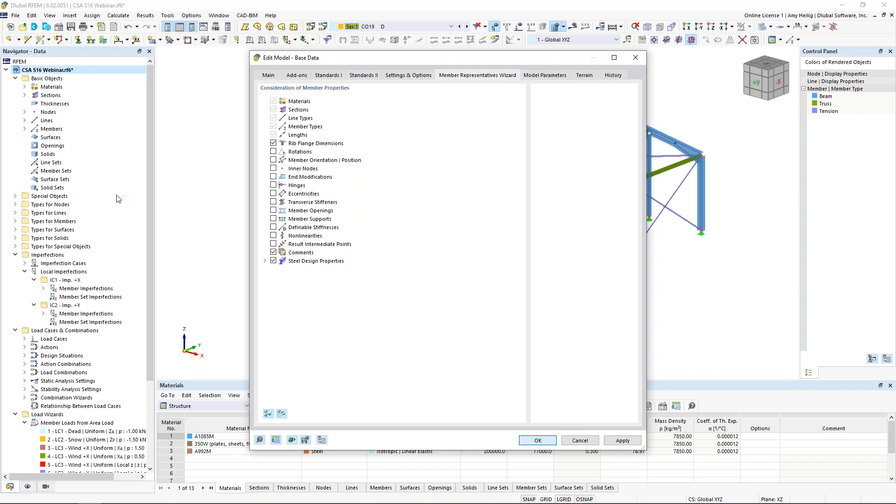So when we turn on member representatives, what we should see here over on the left-hand side is this new option, again where the program has grouped together specific members that are really identical. So how is this going to be an advantage for us?

Well, first of all, we've activated the steel design add-on. Let us highlight every single member here within the model, and I'm going to double click on it - a single member - and notice all members are currently selected within this dialog box.

But because we have activated that add-on, we have additional options here called design properties, and we specifically call out the steel design add-on. When the design properties is turned on, we have these additional tabs up at the top to define information specific to the CSA standard, as well as information such as unbraced lengths. When we have this option turned off, all those tabs disappear.

We are purely going to run an analysis only on those members, so no design. So for now, if I leave all of these options off, we would just be running the analysis only.

But here's where these member representatives come into play. First of all, we'll start off with this first group of members - member representative number 1, it's all of my exterior columns here. I double click on the member representative, and notice that it includes all of these members grouped together here.

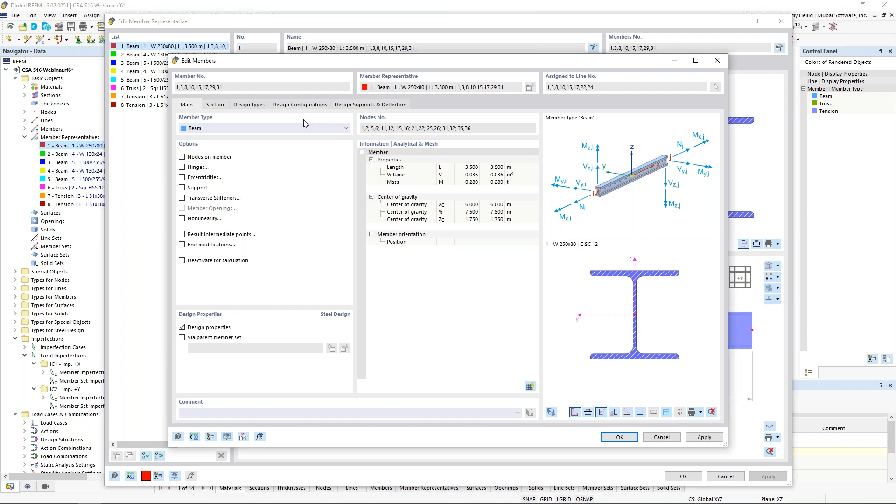So if I go into the edit settings for each individual member, I'm going to turn back on the design properties for only these columns, and I get these additional tabs. Now, I'm not going to fill out these additional tabs for each individual member. Rather, when I click OK, I get those exact same tabs under the member representative now.

So what's the advantage of this? Well, if I need to make any changes to unbraced lengths, for example, rather than having to select each individual member and make those changes individually, we can go into this member representative and make that same change once, and it will apply it to all of these grouped members together.

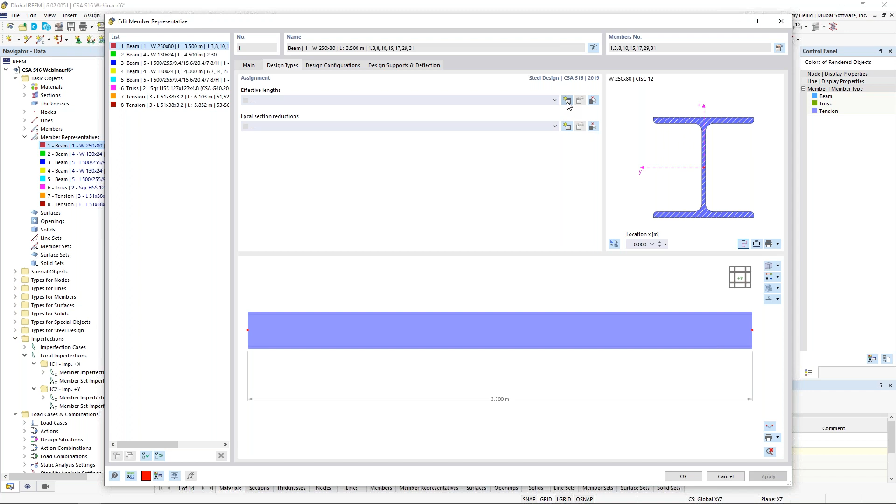So we begin with what we call the effective lengths definition type, or unbraced lengths. Now I create my first definition type here. A little tip is that if we create the first definition type, notice that I don't have any members initially assigned to it. When I click OK and go back in to edit that definition type, all of those members are now populated that belong to this member representative.

The reason why I do that is now I can toggle this picture here to actually see a little visibility of each of these members that I'm currently setting these intermediate supports for.

So when we're talking about stability design for members, we're talking about flexural buckling in the strong and weak axis direction, torsional buckling, and lateral torsional buckling. If we're not concerned with one of these stability checks, we can always uncheck them.

The determination of the elastic critical moment can use a more theoretical approach, which is the eigenvalue method, where we'll take this member, isolate it from the structure, and run an eigenvalue analysis to determine what that elastic critical moment is for lateral torsional buckling. Alternatively, we can choose user defined and input it manually, or use the analytical equations directly from the CSA standard in chapter 13.6.

Under the second tab, the top portion here is where I can place these intermediate supports on my member. This will automatically calculate the effective length, which is K times L, in this bottom portion.

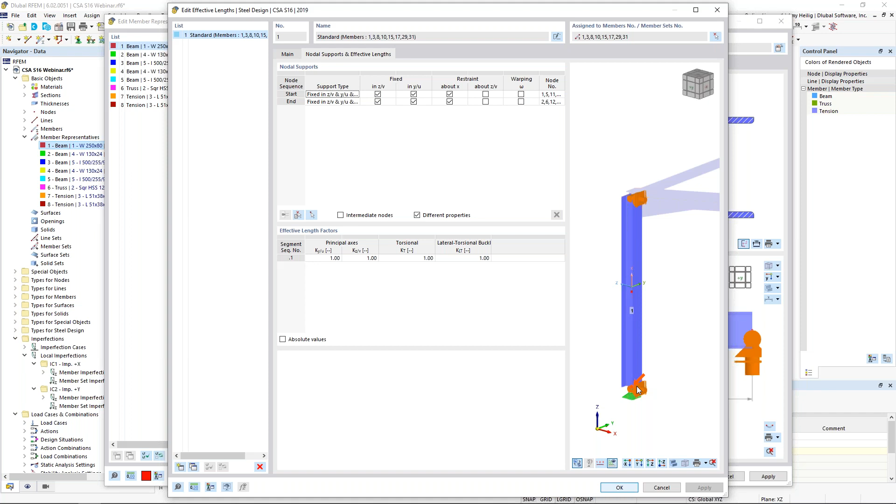Rather, we're just using them internally to calculate what those effective lengths should be, or the unbraced lengths, for the actual design according to the CSA standard. So when we click OK, what we should see here now are those intermediate supports shown at either end of the column.

Now, additionally, we can apply a local section reduction. So if we create a new definition type here and take a look at a new reduction type, we can actually decrease the net sectional area if we need to. This might be important for something like tension design. We don't have that case today, so we'll just leave that empty.

So that's fairly straightforward for those columns. But let's take a look here at our third member representative. Notice this groups together these 4 beams here at the outer moment frames of our structure. Those are all identical, and the program grouped those together in that member representative.

Initially we go into the individual member settings to turn back on the design properties. I click OK, and rather than inputting the unbraced lengths for each individual member, we're once again going to do it here under the member representatives.

We create a new effective length definition type. I can't use the definition type we previously set for the columns because it's different, so we create a new one. Remember the small trick of creating the type, clicking OK, and then going back in simply so that we can...

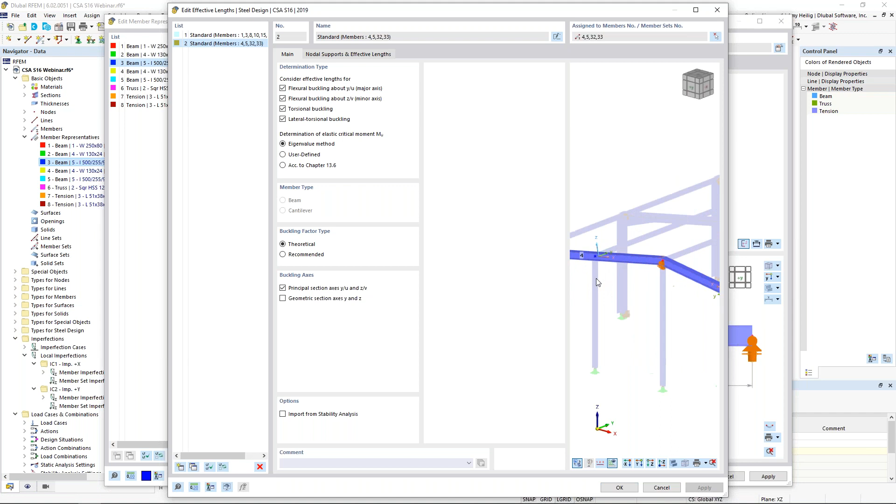See a nice little preview here of those 4 members. This is a bit more complex for our intermediate supports under this second tab, because we have additional nodes here, such as where this column and this beam is framing in, that we'd like to take into consideration. This is going to give us more capacity of the member for stability design. So we have the ability to turn on intermediate nodes here, and then we can graphically select this member back in the model, and notice the program automatically detects the intermediate nodes along the member length where we can apply additional intermediate supports.

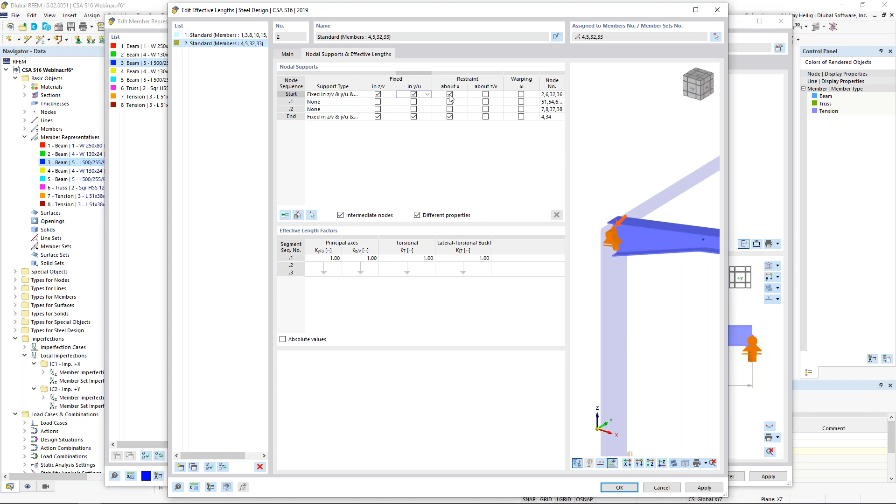We'll begin with this first definition here, leaving it as default, where we have restrained the first 3 degrees of freedom. Now the second node, which we can see here, really means nothing—that node just indicates where the transition of our taper begins and ends. So we'll leave all of these fixities empty.

The third node, though, is where this member has the column framing up in the strong axis direction and this tube framing in the weak axis direction, so we can turn on those fixities with the first 2 degrees of freedom. Finally, at the peak here, the apex of our structure, same concept—we have that column in the strong and weak axis direction, so perhaps I want to turn off the restraint for rotation about the member's local x-axis.

A couple things to note here: all of these intermediate supports are completely dependent on the connection type. No software is going to automatically tell you what the unbraced lengths are—it's completely up to the engineer. So we try to guide you with the locations to apply these intermediate supports, but you'll need to come in and determine which degrees of freedom are fixed or released.

The other thing to note is that when we fix the member in the weak axis direction, we have the eccentricity type down here with this drop-down, so we can tell the program if it's braced only at the upper flange, only at the lower flange, or if we leave this to none, the program assumes it's braced at both the upper and lower flange. This is nice because in RFEM 5, according to the CSA standard, we always assumed both the upper and lower flange were braced at the same time, but now in RFEM 6 we give you this capability to determine if it's one or the other or both.

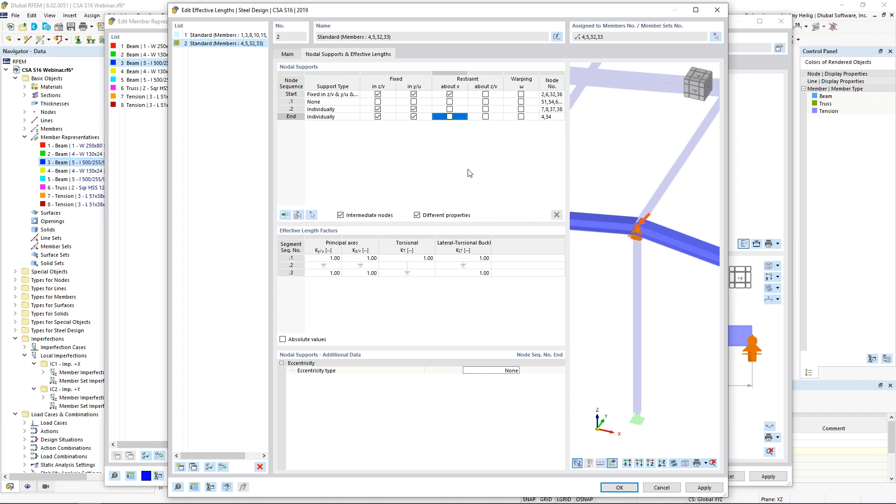So now that we have defined the intermediate supports for these additional members, the final members I'd like to design are these interior beams here. For the final time, we'll go to our member representative number 5, and we can see the relevant 4 members highlighted here. Once again, we'll go back into the definition settings for each individual member, turn on the design properties, click OK, and create our final effective length definition. Remember, I create the definition type, then go back into edit it so I get my nice view of my members. This is going to be very similar to what we just saw for the previous settings—there's just a small difference here.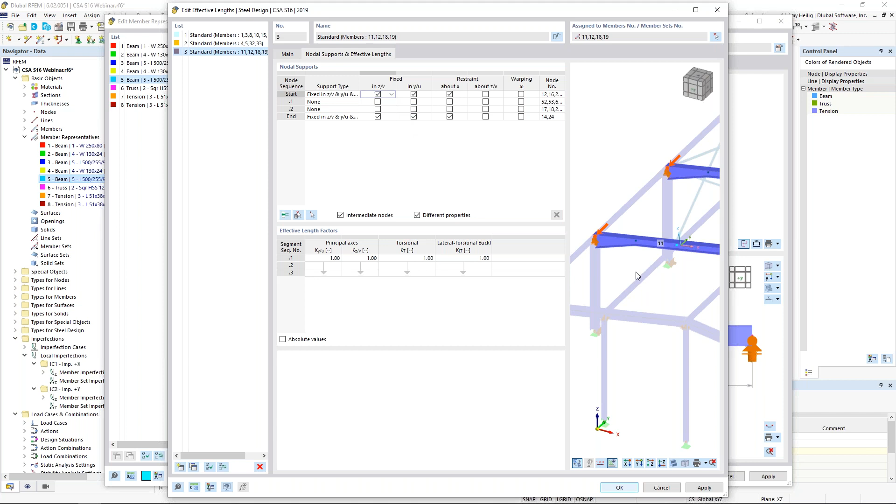We do want the program to detect those intermediate nodes so we can graphically select any one of those 4 members. For the first nodal point here, we'll leave this as the program has suggested—the first 3 degrees of freedom are fixed. Our second node means nothing.

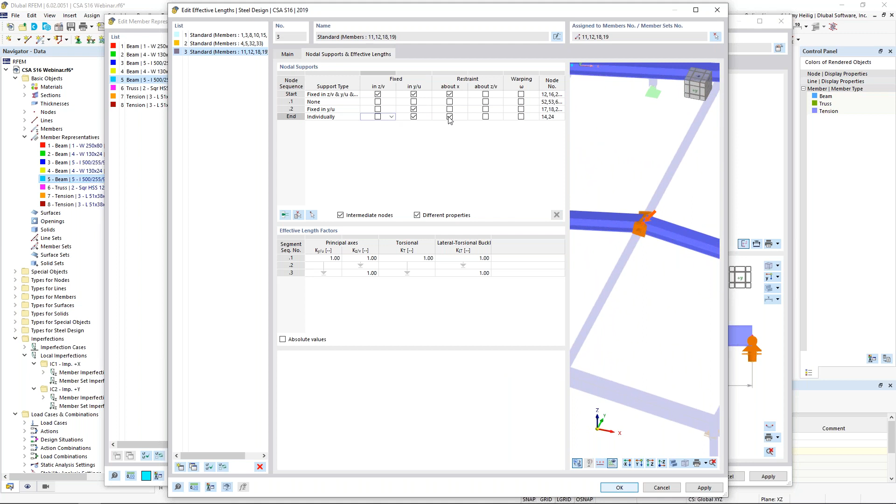The third node here, we do want to only restrain this in the weak axis direction—we don't have any column framing up in the strong axis direction. And finally, at the peak of our structure, same concept: we only have the weak axis direction restrained. We click OK, and now those effective length definitions are complete.

So just to touch on these final 2 tabs here, the ultimate configuration and serviceability configurations, we do have 2 default settings here, but you can come in and create additional definition types or modify this default.

This is information specific to the CSA standard for ultimate limit state calculation, and we can turn various options on or off here.

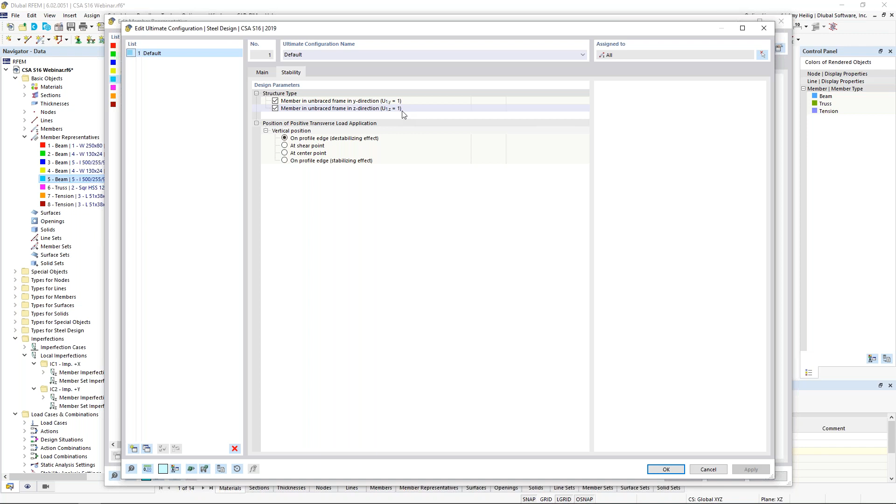Under the stability tab, remember I mentioned that U sub 1 factor in chapter 13, that we can set this to 1.0 if we include little p delta effects. We have this automatically turned on by default, so U sub 1 equals 1.0 because we do consider p little delta effects.

The serviceability configuration is quite straightforward. We have our limiting deflection ratio for serviceability checks. If the member is supported at both ends, we'll use L over 360. If the member is a cantilever, we have L over 180, but you can go in and adjust these limiting deflection ratios as you see fit.

The final tab is design supports and deflection. If I do nothing within this tab, the program assumes the member is fixed or supported at the member start and member end. The full length of the member will be used and will refer to that L over 360. If we have a cantilever, we would want to define a design support at the member start or member end, and then refer to that L over 180.

Alternatively, if we have columns framing up into our members, to give us a little more capacity with those serviceability checks, we could define additional supports at the internal nodes. So taking the conservative approach for our example today, we'll leave everything fixed at both ends, using the full member length.

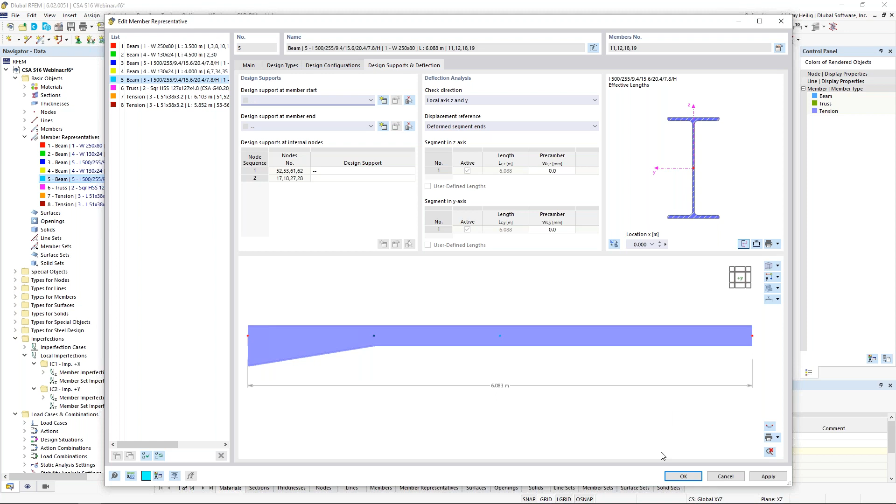We're finally done with all of that input data specific to the steel design add-on as well as the CSA standard. We're now ready to run our calculation.

One final thing to do under the steel design add-on within our table: notice the design situations are listed. We're already familiar with these, and we simply relate them to the relevant limit state type. So factored load combinations go with the ultimate limit state, and our unfactored load combinations from the serviceability design situation go with the serviceability limit state design.

The objects to design: by default, the program selects all members. Notice some members shown here in red, simply because we haven't turned on the design properties or defined effective lengths for those. So the program would give us a small error if we left those in there.

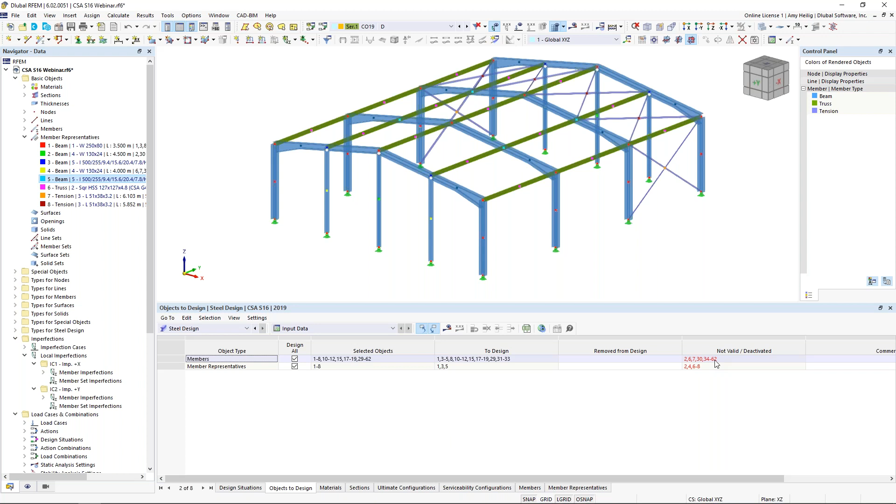Alternatively, we can turn off this checkbox and individually set the members and member representatives. Or a nice tip here is we can simply hit Control-C to copy these members and then hit Control-V to remove them from the design. Notice those disappear, as not valid or deactivated.

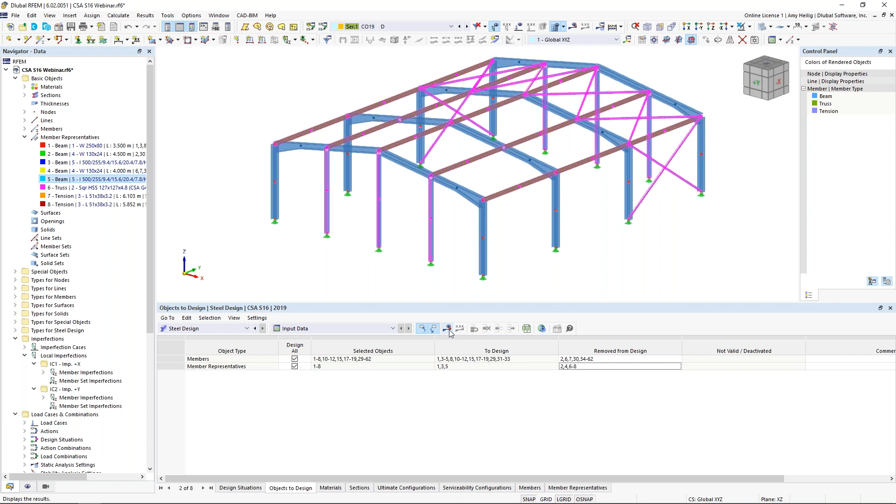We're now ready to run our calculation, so we simply hit the option here to start that, and the program will cycle through all of our factored and unfactored load combinations. You can see it run through those simultaneously rather quickly, and we're also running this steel design add-on for that member design ratio specific to the CSA standard.

With the results in the navigator, we have both the static analysis and the steel design. Looking at the static analysis, we can move to any of these load combinations to view, for example, the applicable global deformations of the structure.

We also can take a look at the member internal forces, such as axial forces or bending moments. We can right-click on any member, and under the member options we have the results diagram, which allows me to turn on and off various internal forces or deflections to see what's going on along the member length in more detail.

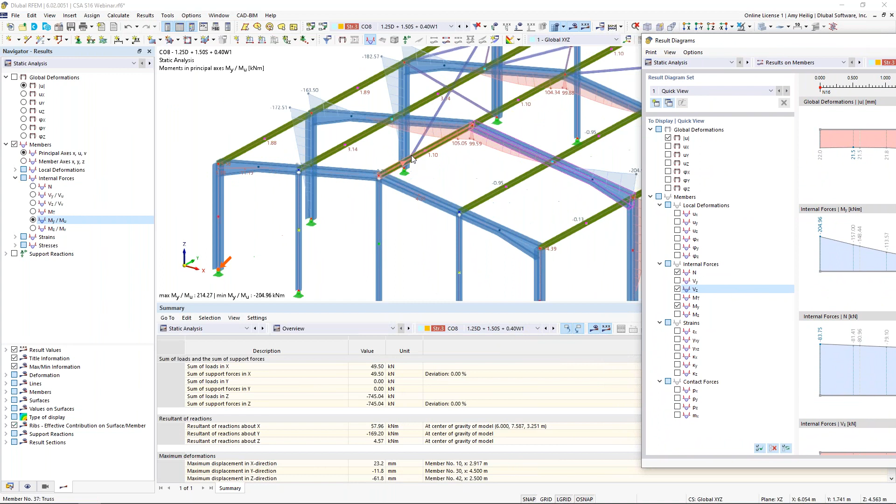We also can move this results diagram to an additional monitor and continue working concurrently in the model, and the results diagram will actually update in real time.

All of the information shown graphically is available in table format as well. We're currently viewing this static analysis, and under our second dropdown we can view results by member. If we look at the internal forces, we can click here in the table, and notice the graphics are synced up to the table—that red arrow shows exactly where that internal force is located. We can export this to Microsoft Excel for further sorting capabilities.

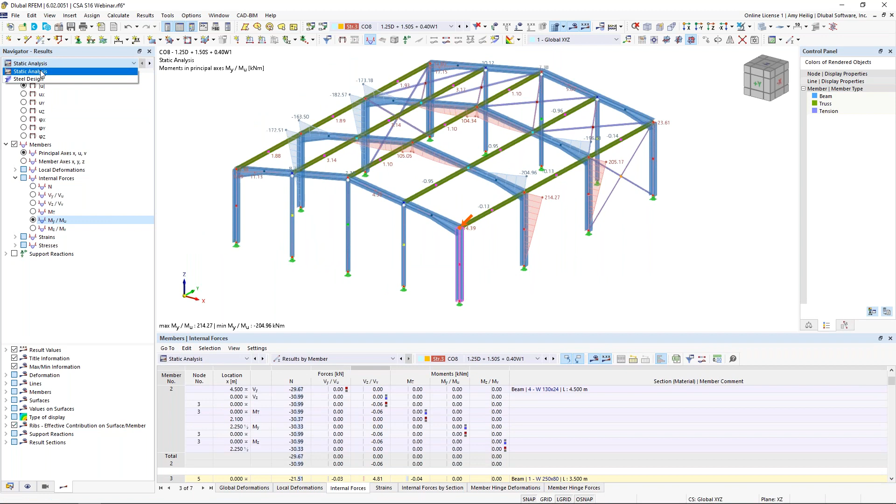That's all possible here. But additionally, we've also run the steel design at the same time. So we drop down to this option now, and we can see within the table that we're currently looking at the steel design results.

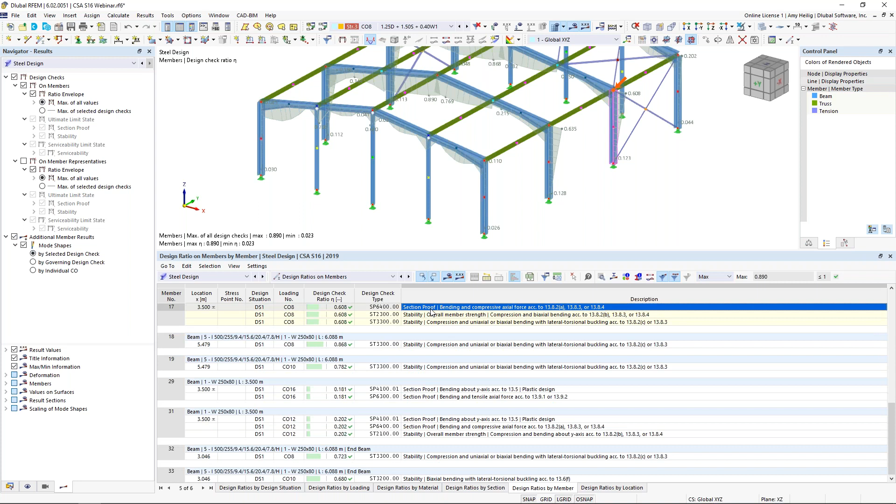We can view the design ratios based on the members or member representatives. If we look at the design ratios by member, we've grouped each member here. This table is synced with the graphical view to show you every single design check applicable within the CSA standard, not just the controlling check. But if we're really only interested in the controlling design ratio, we can use our filter option in the table to filter to the max, and now only those max design ratios are shown.

What else you'll notice is that when we're looking at one of the stability checks, we get a deflected shape shown here. This has to do with the mode shape shown over here in the navigator. Remember, we are designing the lateral torsional buckling based on that eigenvalue analysis, so we show you the failure mode for that eigenvalue mode in order to determine the elastic critical moment.

What else is new within RFEM 6 is what we call the design check details. This is very powerful in the new version, as we now give you all formulas line by line, so you can follow this entirely to determine how that ultimate design ratio was calculated. We give you all variables, all code references, and how the section was classified. We can see all of that information shown here on the left.

We can add these calculations to our printout report as an image. The image will update in real time if we make any modifications to the model and rerun that calculation. So very powerful, and really trying to avoid that black box software, giving you as much information as possible so you can compare to hand calculations and really understand where the program's numbers come from.

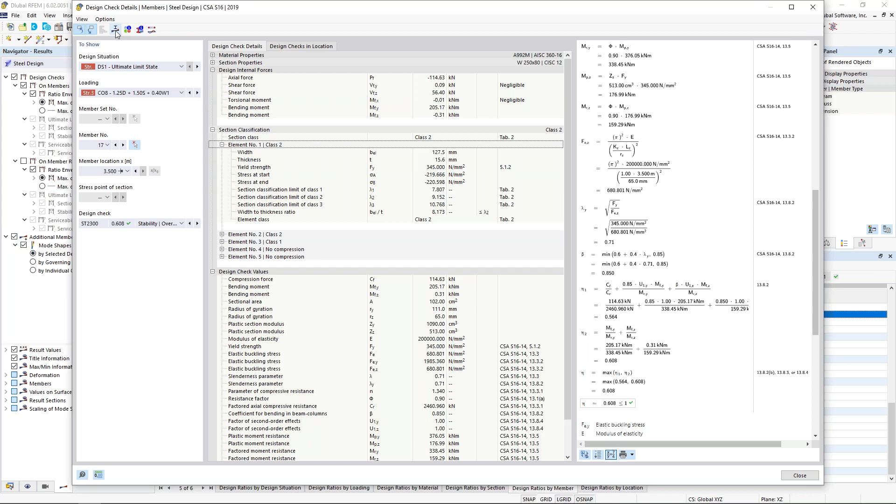One final thing to mention is the results diagram in section. We can actually view the stresses of the member at a particular X location—for example, normal stresses due to the normal force, normal stresses due to bending moments, shear stresses, or even von Mises stresses. So if we're interested in the actual stresses of the member rather than just the simple design checks from the CSA, that's all available directly within this same dialog box.